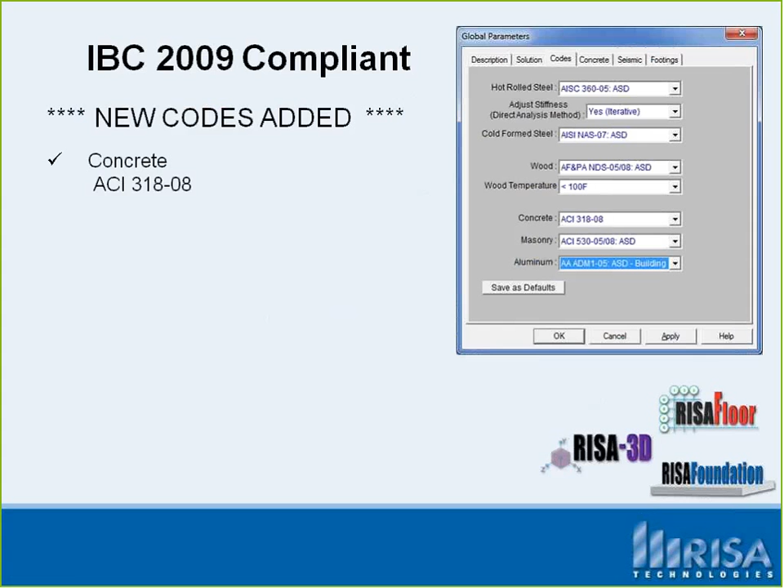Some smaller things will affect you interface-wise for this. A lot of these codes got updated but didn't really do much to your interface. For Concrete, you're going to see there's a Lambda that was added for 2008, and that'll be in your materials spreadsheet, so look out for that. The Wood NDS 2008 was also added.

That one really doesn't have a whole lot in the interface. You might see some wood schedules that were updated for the IBC 2009 if you're using wood shear walls, but for actual NDS 2008, you're not going to see too much interface change there.

Cold form steel was added for the 2004 supplement, which is really small, just a supplement to the 2001. 2007 did introduce a little bit more changes there. Interface-wise, you might notice some differences in your detail report. We also went ahead and updated the AISI database of shape materials and the SSMA database of shape materials.

Those have been updated for the 2007 AISI. If you are using cold form steel, these are really different shape properties than what you were seeing in the 2001. Not so much that they've changed the shape properties, but you're going to get different results. So make sure you pay attention to whether you're using 2007 SSMA shapes or 2001 - that one was kind of a tricky one.

Masonry has been added to adjust for the MSJC 2008, which is kind of new there. Also, the international codes were updated - we put in the Canadian concrete code for 2004 and 2005, and updated Mexican cold form steel for 2004 and 2007. For cold form steel, that just rides right off the American code, just like the AISI, so you'll see that will be almost identical.

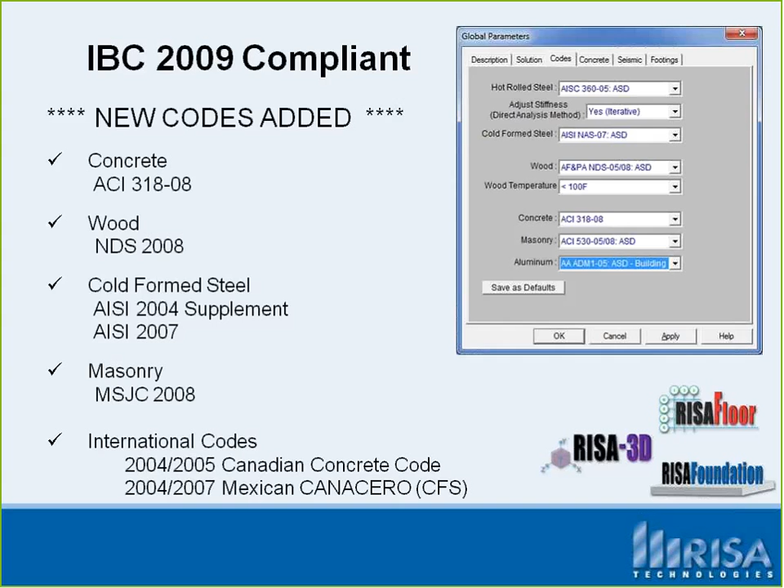One of the big features we added was concrete wall design. We've had masonry shear walls and lateral walls in the program - you can use them as gravity walls. We have wood walls in there, and we had a general wall. Now this will be brand new to RISA-3D and RISAFloor: concrete wall design. So what will be cool here is that we're going to be able to do gravity and shear wall design with this wall feature.

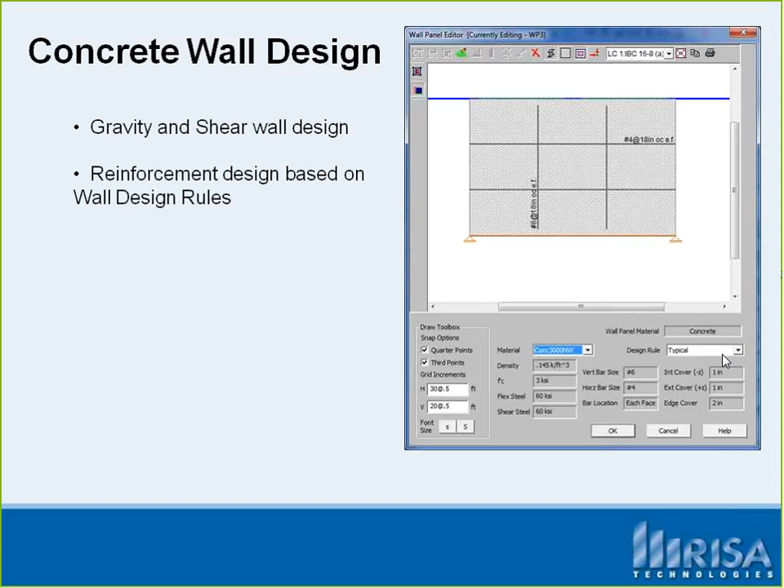This wall panel editor on the right looks exactly like what you'll see when using masonry. You can notice on the bottom it gives you all the information - the materials, the density. It's based off a design rule, just like when we use a masonry or wood wall, so all this information will be similar to that. Reinforcement design is based on the wall design rules, so just like in masonry, we're going to go into the design rules and adjust all that information. We'll specifically look at that in the next couple of slides.

The deflection is going to be given to you based on the FEA results. So while you're drawing walls, really what's happening is there is actually a plate model right behind the scenes. It really is just going to be the wall is for design, but really you have a plate model that's built in and submeshed behind there for you. So you get all your deflection results based on the finite element analysis. You're going to get P delta analysis for first and second order effects there, so little P delta and big P delta for concrete walls, which is really nice there.

You're going to be able to have the crack factors. Now these are specific for the wall panels, and you're going to find them specifically in the wall panel spreadsheet, not in the global parameters or anything like that. You're going to find it right in the wall panel spreadsheet, so you could actually change it per wall if you had a different crack factor.

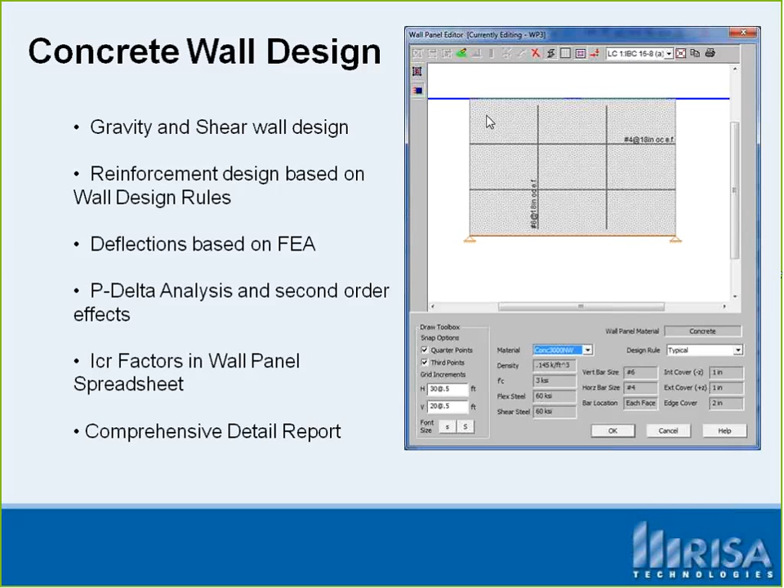And then we have a comprehensive detail report that we're going to be able to look at specifically when we get into the program. So what I'd like to do is walk through these slides first, and then we'll jump into the program. Okay, so next, let's talk a little bit about the concrete wall design specifically for the design rules.

So here we see that the program is going to be giving us a design rule for concrete wall rebar and cover. What we're looking at here is actually going to be our cover information.

We can tell the program to use either outer bars for the vertical orientation, so we're going to tell the program to put your vertical bars on the outside, or we can tell the program to use horizontal bars on the outside. Now that affects the way your D is measured from the vertical bars. So you can see in my picture here, it's a little hard to see, but you have a little D in there, and it's going to be measured from whether it's from the outside or from the inside, and that's going to make a difference in your calculation.

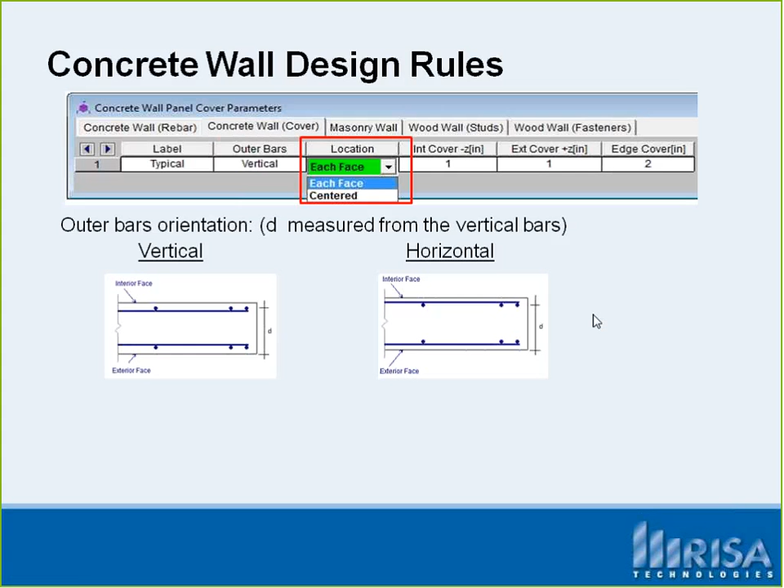You can also tell the program just to use centered location or each face. So what we're looking at here is on each face reinforcement, but we could have told the program to use bars centered, which will run the bars right directly through the middle of the wall.

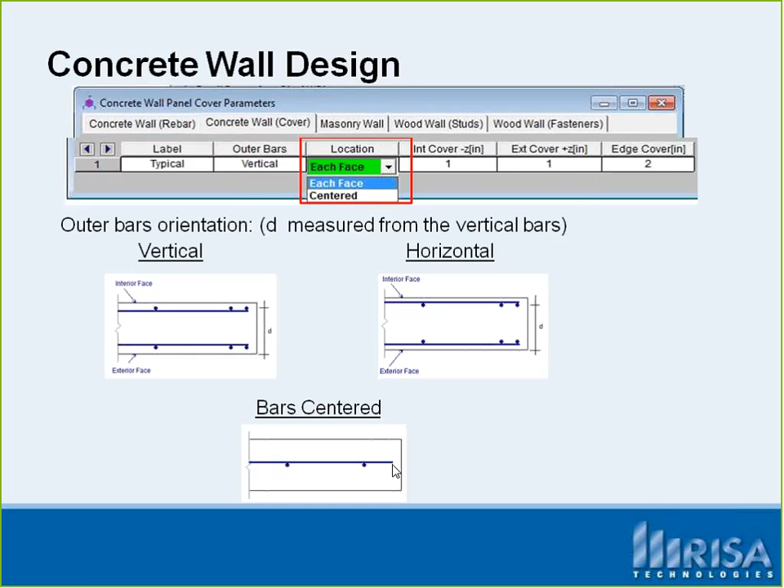The next thing you have control over is whether you're going to be doing any different cover from the inside or the outside of the wall. So you can tell the program here, and you see this is internal cover versus external cover, and you can tell it whether you're going to be having 1-inch cover versus 3-inch cover on the interior or the exterior.

You can also tell the program there to do an edge cover. So what you've got here is you're going to see this little 2-inch distance from the edge. You can tell it 2 inches right there on the edge.

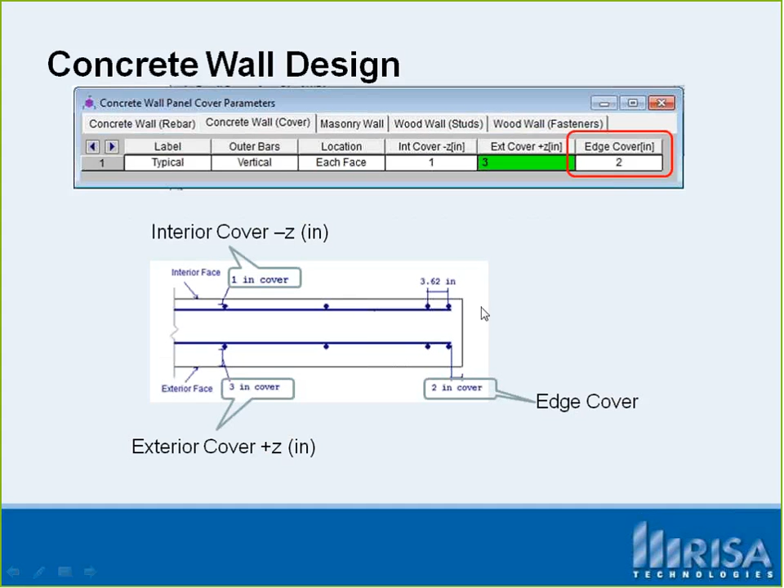The last little piece is this dimension up here, and that one's just because what we're doing is we're centering those bars. So what we have here is a little bit of extra. So we're using, in this example, 3.62 inches extra on the side because the interior bars are all going to be spaced evenly, and that extra little piece is spaced out here. So it's just an important note to make there when we look at the detail report.

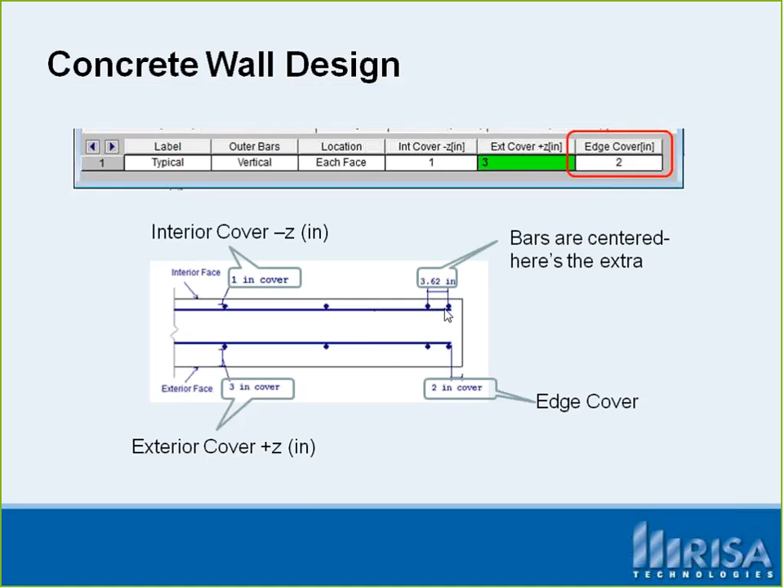Concrete walls here are also going to be color-coded based on the rendering view. So what's happening is, as we just talked about, we have the ability to do interior and exterior. Well, it's important to know which is the interior versus which is the exterior. It could be kind of tough if you didn't know that. So one of the nice parts is that we've got it color-coded. The exterior is a dark gray color, and the interior is a light gray color.

So you're going to use a negative Z there. And this Z, when I have that little Z in that positive Z, what that's indicating is your local axis. So you can indicate, actually, if we could turn the local axis on, we could say, okay, that would be the positive direction of the local axis versus the negative direction of the local axis. One of the tools that we gave you here is that if you make a mistake, which happens to me a ton, and you draw the walls in the wrong direction, what I do is I just use this flip axis tool.

It's directly under my Draw New Walls. You'll see a new tab called Modify Wall Panels, and right down at the bottom you can say Local Axis Out of Plane Flip. So you can flip those axes yourself. That's a really good tool there.

Then the next piece here, we'll go back into concrete walls, and when we jump into a model, the next really great tool we added is seismic detailing and design provisions. Now this is a big actual feature, and it covers a lot of different codes here.

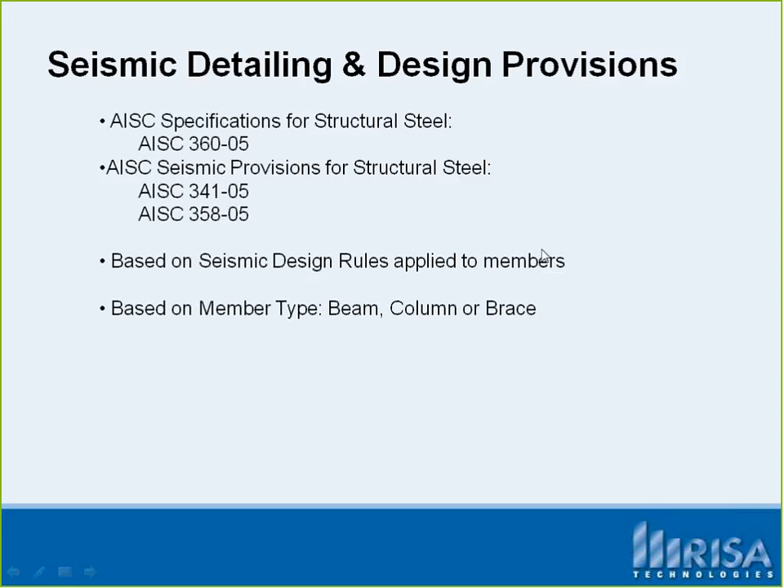This is also going to apply to our earthquake loads. So when you use our load combination generator, it's going to help you develop these earthquake loads, also with overstrength. This is something that did get added in the last version of the program, but I'm not sure if everybody knows and has been using it, so we will review that.

If overstrength is required, you might have it for your beams and not your columns, or reverse that - however it's set up in the code, you need it for one, not the other. You can adjust that. What you'll specifically look at is making sure you use your EL or your ELX, where you actually use the earthquake load in your load combination. The load combination generator is going to automate that for you.

Results appear in the detail reports and in the spreadsheet. So all of the output we're going to get will be listed in each member's detail report and then summarized in the spreadsheets for us.

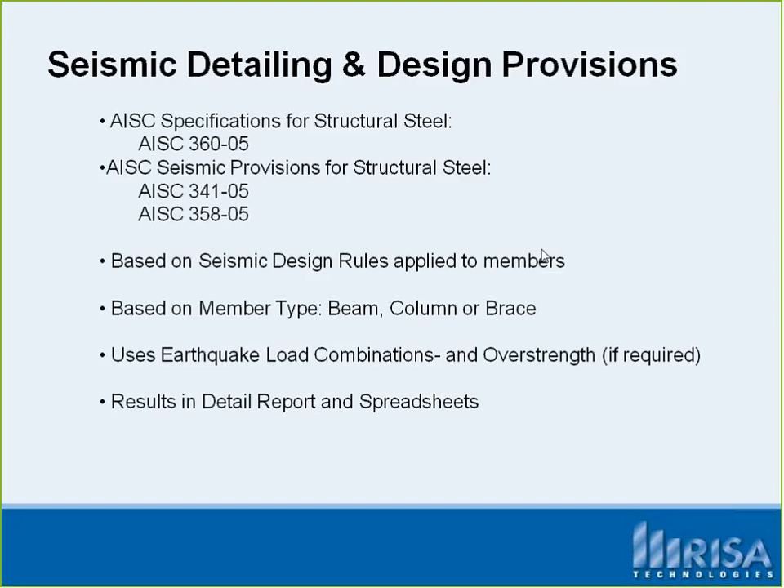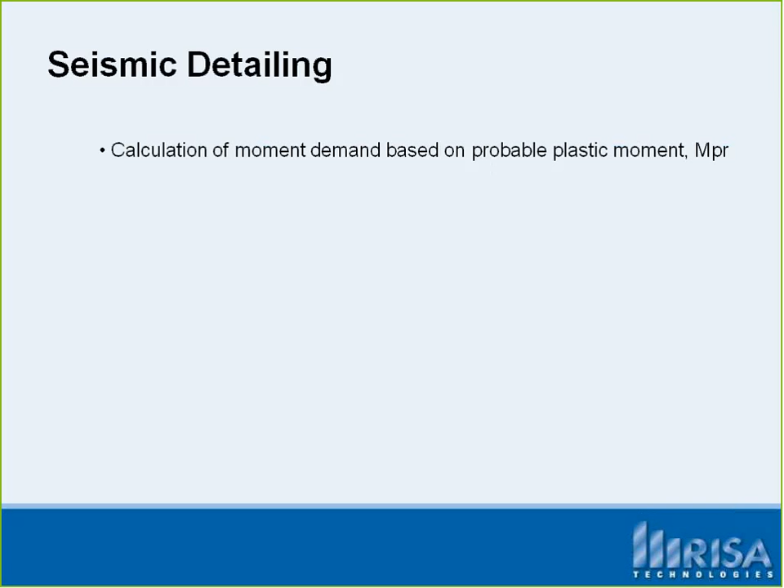So we'll look a little bit closer at seismic detailing. First of all, what are the things we're doing with seismic detailing? It's kind of a vague topic, so this goes a little bit farther. We'll talk about a lot of the little things we're going to be calculating for you, including the moment demand based on the probable plastic moment, the MPR.

We'll see that we're also going to be calculating the panel zone shear requirements - you're going to get a whole big area on what the panel zone requirements are for shear. As well, we're going to do a calculation of the required shear demand for moment connections. We're also going to be going through here...

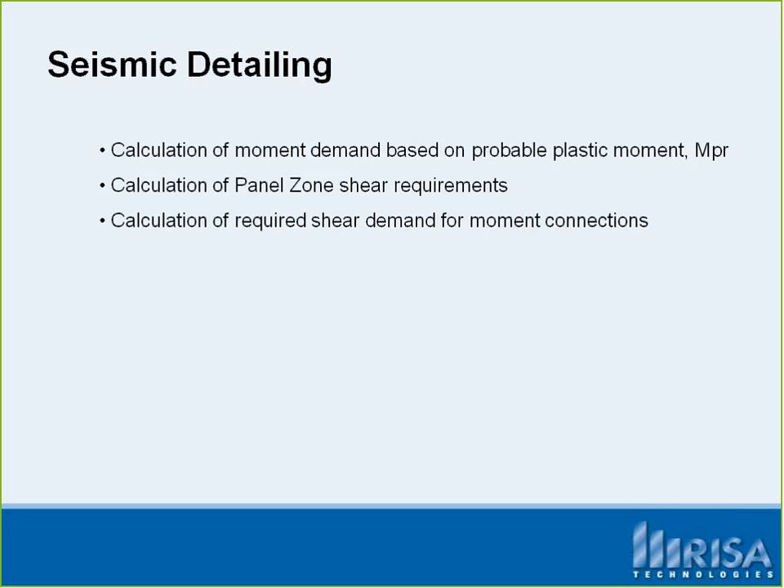This is actually - looks like my picture's a little off here - but what we're going to be doing is the compact sections. We're going to be giving you whether it be seismically non-compact or compact. You can find that information right off your 358 - actually, excuse me, 341 is where you're going to find that.

And that's going to be in the tables, labeled as sections that satisfy local buckling requirements. It'll tell you whether it's seismic or non-seismic compact, and the program will check it right there for you too.

We're also going to do clean column checks for you, telling you whether you need stiffeners or continuity plates, based on your columns.

We're going to give you some strong column, weak beam checks for you. The program will actually know what frames into it, what beam frames into the column, and it's going to check that information for you.

We're going to do brace slenderness checks, so if you have a braced frame, we're going to do the slenderness checks for you. The calculation of the unbalanced forces for the braces is an interesting one - I'll show you more about how we're doing that. It's calculated for the brace and then reported on the brace and also on the beam that it applies to.

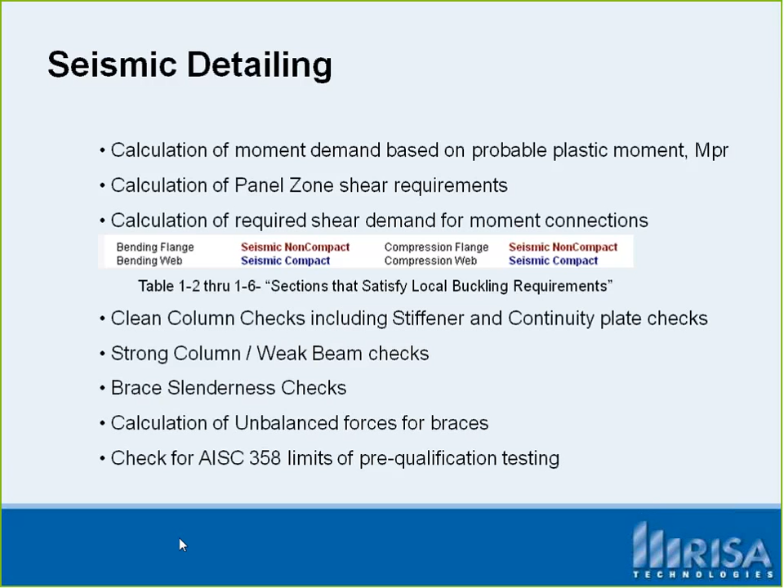And then we're going to do some checks for AISC 358 limits for pre-qualification and testing. You're going to get a lot of miscellaneous checks during your analysis, and it'll report to you. This is just some of the list, and it gets more detailed as you get more involved with special moment frames or intermediate moment frames. But I wanted to give you a brief summary of some of the things we're doing.

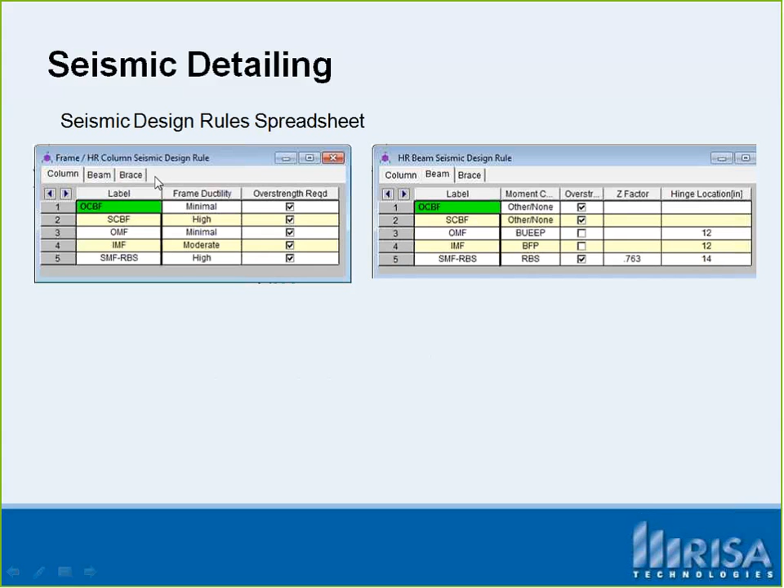What you tell the program specifically is in the seismic design rule. You can go into the seismic design rule, and this is a default that will be set up for you. So you won't have to set up your defaults, but you will want to know what's happening in here. You'll first notice it's broken up into tabs as column, beam, and brace.

The first thing under columns is your frame ductility. You're going to tell the program whether you want high, moderate, or minimal. For a special moment frame, it's high ductility as the default. For an intermediate moment frame, it's moderate. For an ordinary moment frame, it's minimal. So that's the setup as you're following there.

Then in the next column, you tell the program whether you need overstrength required. A column will have overstrength required for a special moment frame, and also for the beam tab we have special moment frame checked for overstrength. But for the intermediate moment frame and ordinary moment frame, OMF and IMF, those are not checked for overstrength.

We're going to be using the overstrength load combinations for some of these things versus others. So load combinations just got a whole lot more complicated, but hopefully through these quick check boxes, it makes it so easy for you to check on and off when you want it to apply.

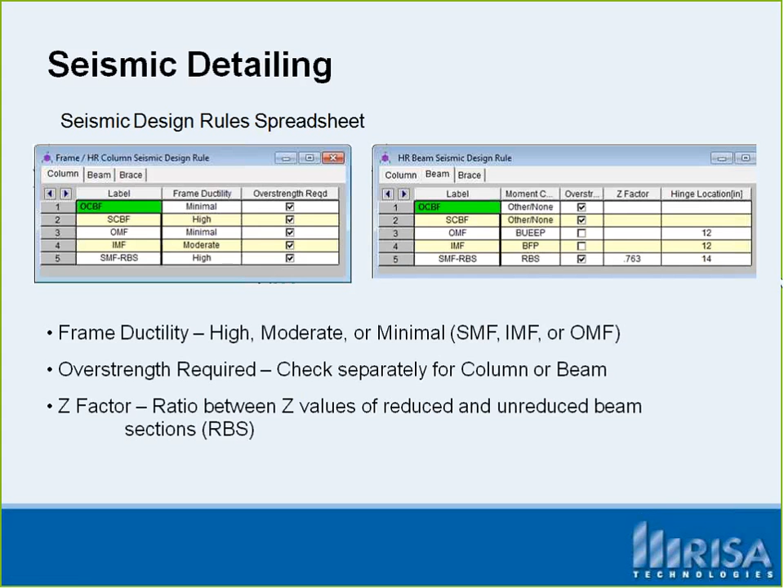The other thing we see in the beam spreadsheet is a Z factor, which is the ratio between the Z values for the reduced and unreduced beam sections. For RBS, reduced beam section type connection, you'll have this factor to apply, calculated based on how much you're taking out of that beam in the dog bone area.

The hinge location is another thing you can tell the program if you're using any of your moment frames, and that's your hinge location measured from the face of the column to the hinge. So those are the columns really that you need.

The brace is just going to ask you if you want to apply the special KL over R for that. So that's really all you need to do for seismic design rules to set it up. The last column is the moment connections and how you're going to be doing the moment connections.

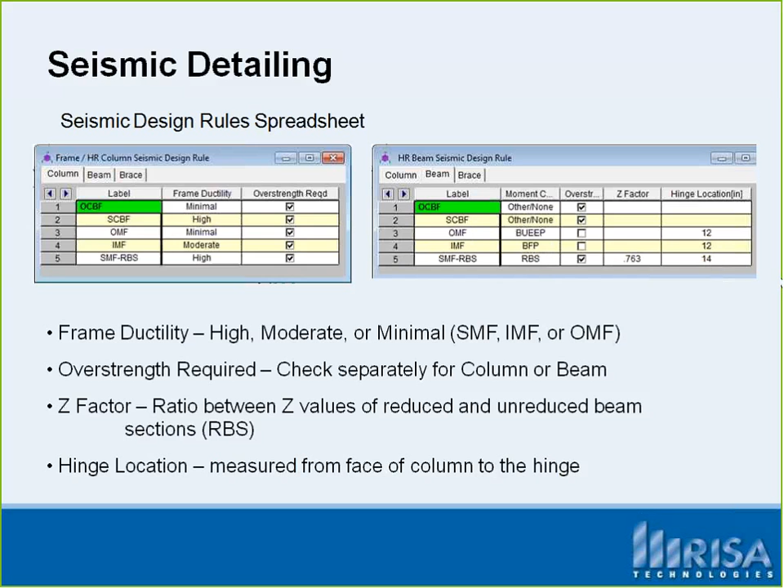We're going to see that in the next couple slides about telling the program what you're going to be using. But that's really all you need to set up, and what's nice is these defaults are there for you to get started. So for seismic detailing here, I'm going to actually jump ahead really fast.

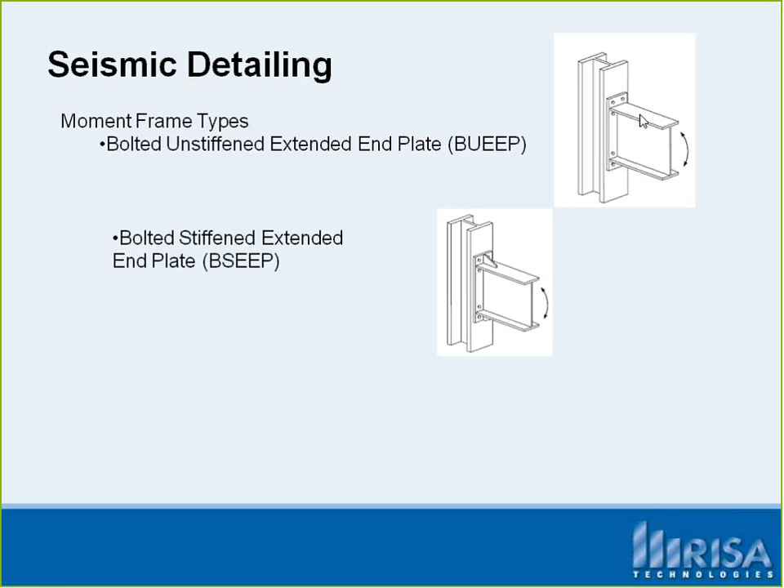The next one you can do is the moment frame type using the bolted unstiffened extended end plate, or BUEEP. That one, the picture is just showing you here, so this one's just not stiffened. The next one you can do is just a stiffened version of that, a bolted stiffened extended end plate, and you've got that stiffened right there.

The next one you can do is a welded unreinforced flange, welded web, so WUF-W, that's kind of that picture right here. So you've got all those different options. And the last one is going to actually be your braced frame.

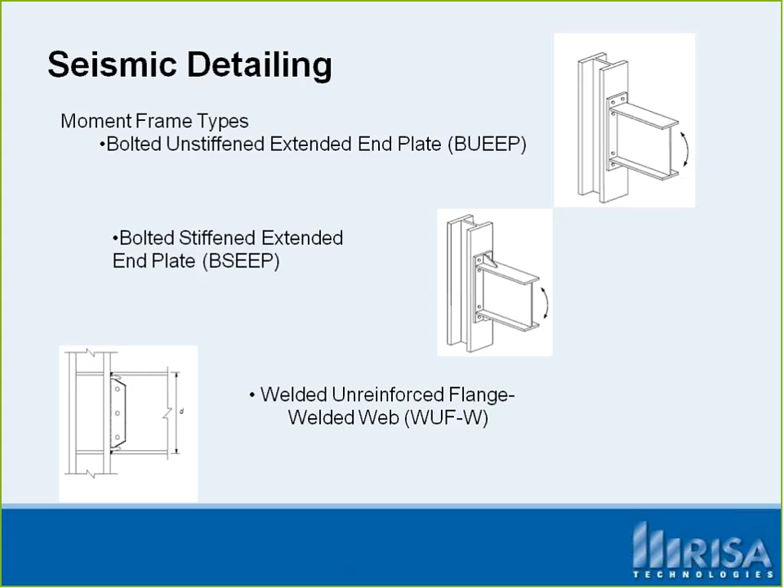I'll show you a quick picture of what we would talk about with a braced frame. We can do a braced frame like this, we can do inverted, we can do any sorts of braced frames here as long as it's a concentrically braced frame. What we've got here is a picture.

What I wanted to show you specifically for the braced frame is that it's important that you note that you can get your unbalanced forces. And what our unbalanced force here is going to be showing us is that we've got braces. You apply these braces, you've got forces in the tension direction and in the compression when we apply the load to it. You see a free body diagram of the tension versus the compression and where it connects into the member.

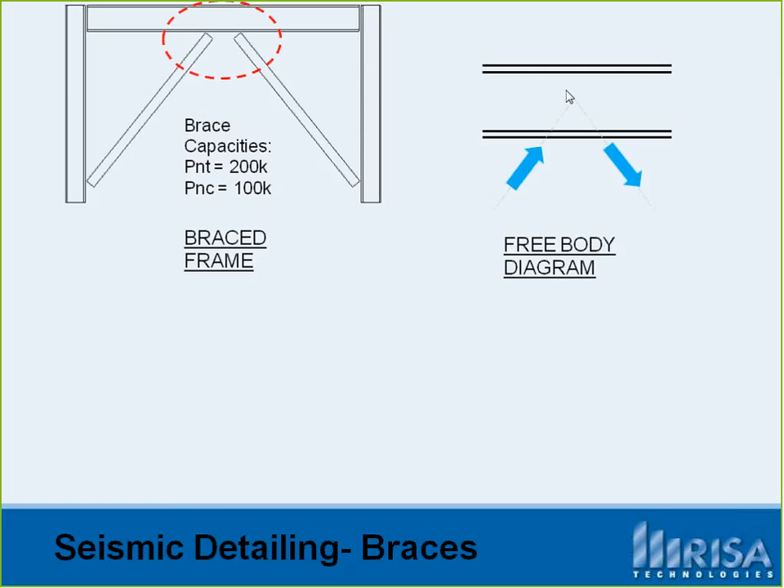If you see what typically happens with a braced frame, you're going to have a compression brace, and the code is going to tell us that we can use up to the tension value right here, but we need to reduce the compression value as it buckles. So we're only going to be using 30% of the compression strength in this brace right here.

So what happens in the model is that you get an unbalanced force in the beam. The beam is going to experience this unbalanced force. So what RISA is going to give you here in this detail report is the forces of that component on a detail report. This unbalanced force is broken into two different components, vertical and horizontal force, that's going to be applied to the beam there. We're going to give you that force in the actual brace report, and we're also going to see it in the beam report.

One of the things I did want to quickly show you, I misordered my slides, but I want to show you a little bit about what the color display is going to be able to give us. Seismic detailing here is going to be able to show us the color coding and the display of the design rule on the actual member, which is cool.

We can see here we're using ordinary concentric braced frame, specially concentrically braced frame, all listed on there. If by chance we made a mistake and we were mixing things up, we would see that color coded. The other thing it's going to do is give us column stiffness checks right on the color coding. So I just like to show you how that looks in the legend. It shows us whether you're going to need web doublers, whether you're going to need continuity plates, or in green, a clean column check, basically.

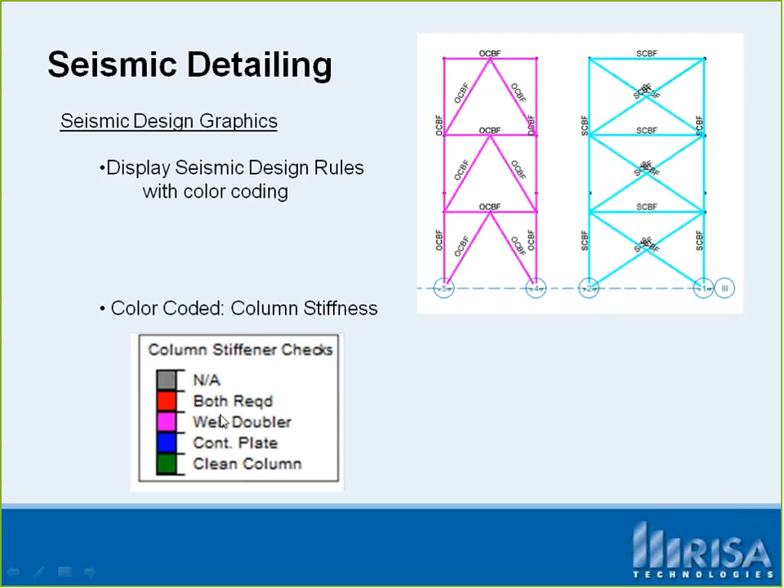So the whole model we can color code, and if everything turns out green, then basically we have clean columns all over our model, which is great. That's an easy way to check it, and everything in gray doesn't apply. So we can see that in the model, I'll show you that once we actually run the model too. Let's take a look, keep going. Sorry about my misordering.

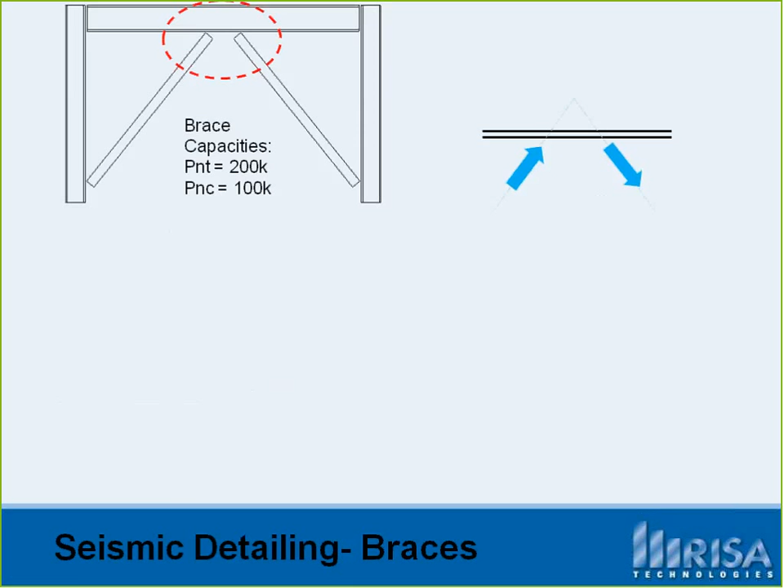The next piece I want to jump into is some of the little things we've got in RISA Foundation. We added overturning for the mat slabs as well as sliding checks for the mat slabs. So when you're in RISA Foundation, we've added a safety factors tab right at the bottom, and you'll see overturning safety factors and sliding safety factors spreadsheets. That's going to give you all the different information. So when you're doing a combined footing, you'll get everything you would have gotten if you were just doing a single footing for the overturning and sliding checks.

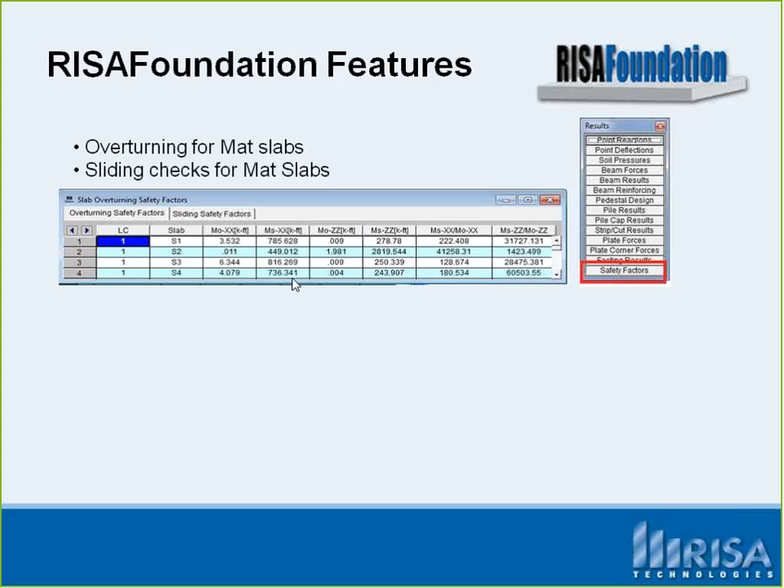We also added a new quad mesher for the FEA analysis, which makes everything much faster for your slab design and more accurate. When we talk about quad mesher, we're really just talking about the plate design and plate analysis. That's what is happening in the wood walls, concrete walls, and masonry walls. We were able to put that right into RISAFoundation, so you get a speedy result compared to what we had in the older versions.

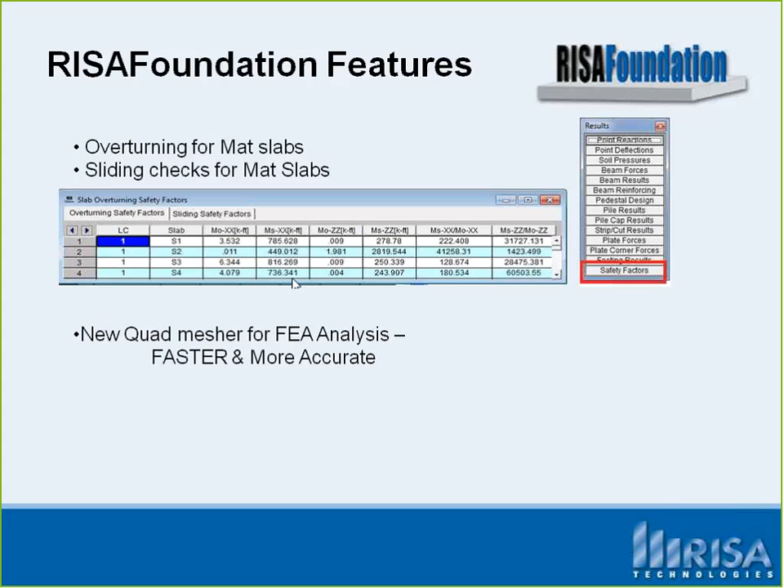The other thing is we've got a pile cap export. So we can now export all of this DXF directly for the pile caps as well. We have a lot of different DXF export options, but pile caps was one of the last things to get in there.

Additional checks we've got in the program too - we've added several little things here I'd like to point out. We have single angle bending checks. That's a big one that folks have been asking for a long time, to be able to apply bending to a single angle. It wasn't so typical when RISA-3D came out years ago, but it sounds like lots of folks are trying to actually use their single angles for bending, so we added that directly into the program.

I showed you a little bit about that wall local axis flip - that was an easy thing to see, but we can also see that in the program. We added P-delta for walls. Concrete was one of the things that required that, but we were able to add that directly in also for masonry and general walls. You have the P-delta analysis.

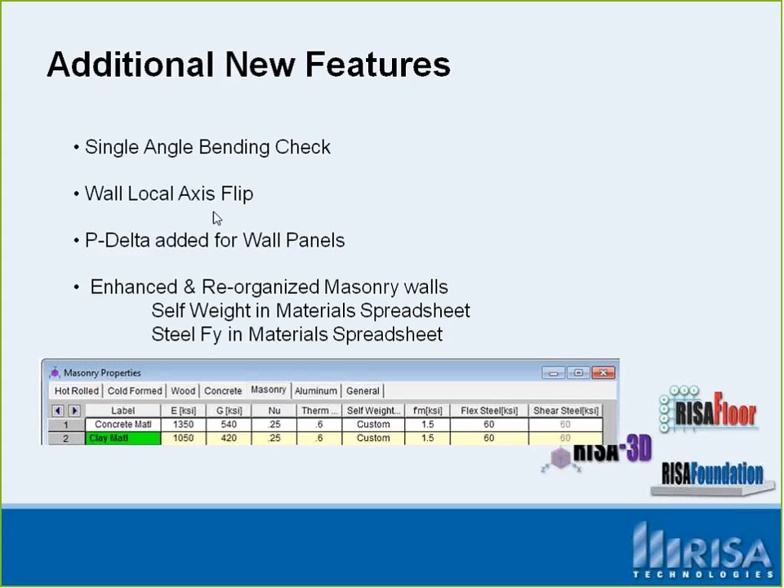One of the things you're going to see is that we had some enhancements to the masonry walls. If you are familiar with using masonry walls, there are just a couple of enhancements and reorganizations, and I wanted to point out so you don't get lost that things like self-weight went directly into the material spreadsheet, as well as you're now going to find your steel FY in the material spreadsheet.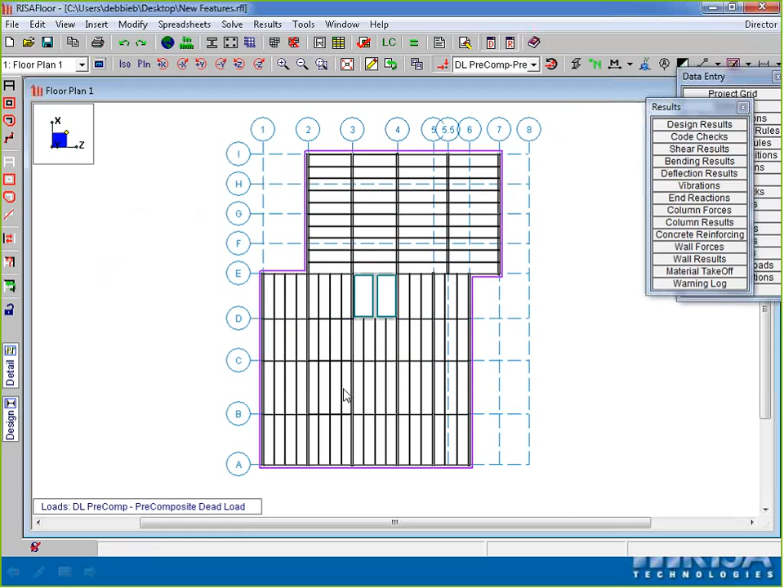One of the things here I want to do is jump right into RISAFloor and see a model in action. Specifically, we're going to jump right into this model. It's just a 3-story model I built, with some moment frames and some concrete walls, but in particular I just wanted to show you a couple of the aspects in this model that we added here as differences.

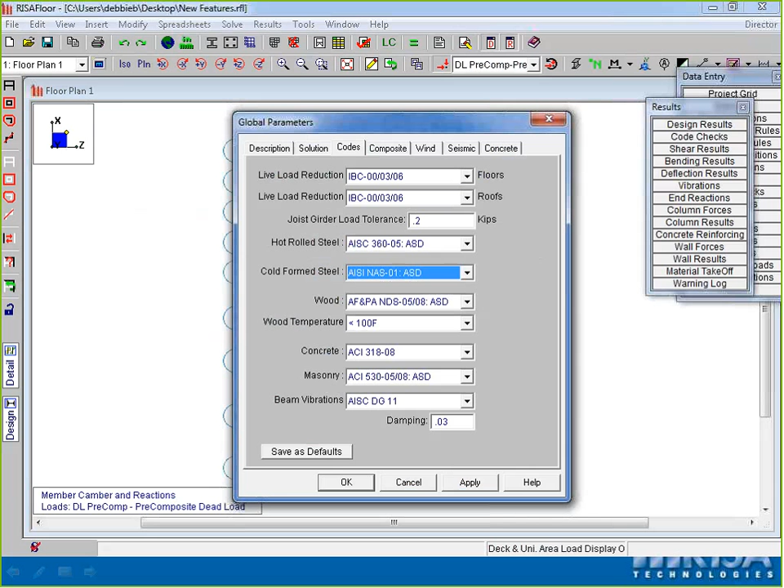So like I mentioned, you've got the codes that were updated directly - you've got the 2007 AISI, and I'm running here some wood, 2005 and 2008 wood. The seismic tab has really been the same in RISAFloor since you've been doing a lot of this in RISAFloor forever, but you will see that you have the omega factors added in here, and the rho is added in here.

Let's take a look at our concrete walls. If I just double click on a concrete wall, this does have reinforcement listed on it. You can toggle your reinforcement on and off by just clicking this button on the left. But like I mentioned, it's going to be based on my design rule information.

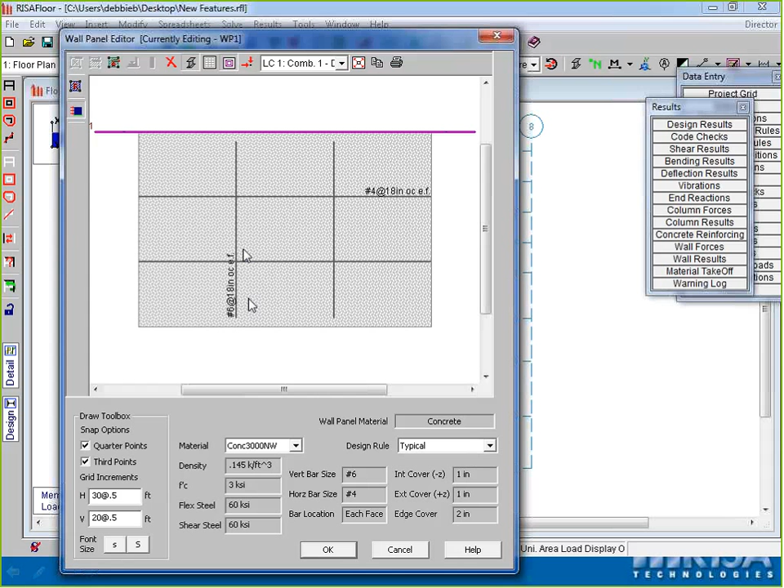One thing I didn't mention that's really important is that you can control this reinforcement design directly in the wall design rules. The concrete wall rebar tab gives us the ability to control the vertical bar spacing and the maximum and minimum spacing there.

You've got the size and the maximum spacing, and the vertical increments. That tells the program how often to increment when it doesn't work for design. So we start at 4 inches, go up to 6 incrementing by 2, then to 8, and so on until we get to the maximum vertical spacing.

I'm not going to clear my results so we can jump into the next program. You can also control your horizontal bar spacing, and you can control all of that right there. Another thing to note is that we broke up the design rules, so you're now looking at member design rules separately from wall design rules. I don't want you to get lost if you're familiar with just that one design rule tab on the data entry—we broke it into two different items.

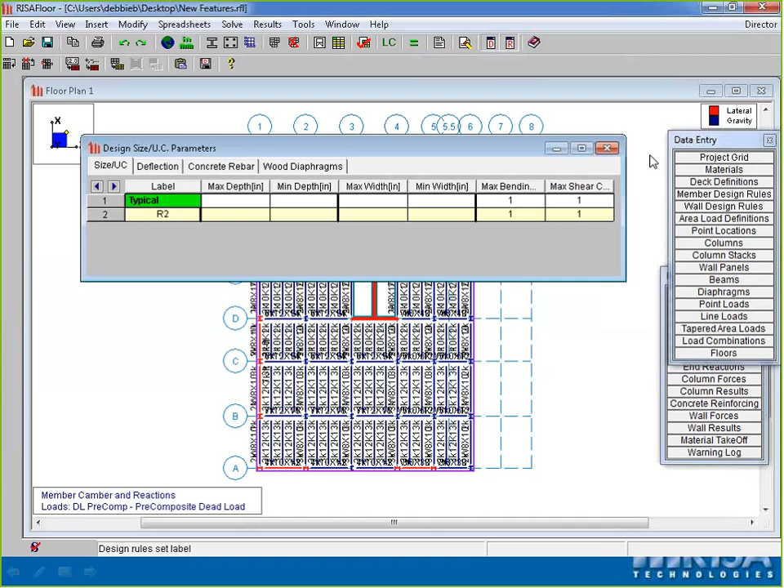We can also look at the detail report here in RISAFloor and see what we've got available. This is only for gravity loads, looking at ACI 318-08, and what we're seeing is an echo of all the information we put in. We told it number 6 bars for vertical, number 4 bars for horizontal, and the materials we had in here.

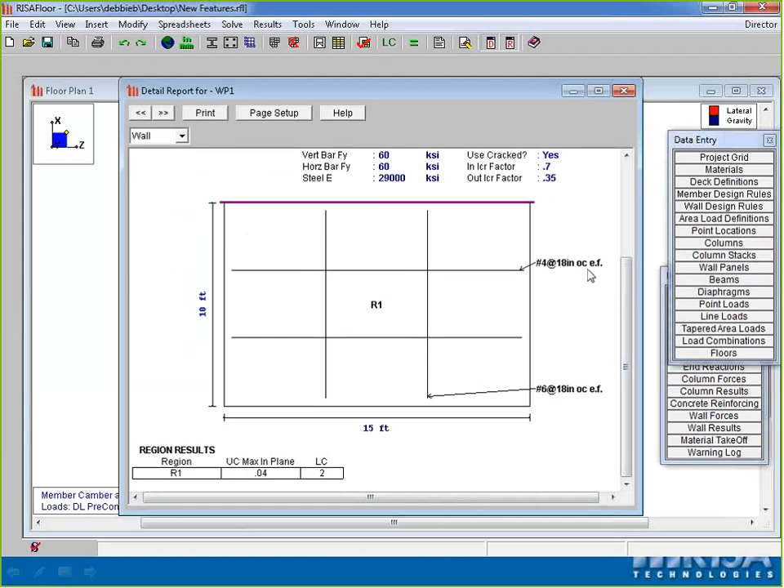Scrolling down we can see there is one region controlled by load combination 2, and this is the detailed picture—number 4 at 18 on center and number 6 at 18 on center, each face. I can also look at the region report.

Again, this is only looking at the gravity loads—we haven't gotten into lateral yet. So what we see here is just the gravity information, with a nice detail report and cross-sectional detailing at the bottom. We'll look at this a bit further in 3D since it'll be more informative.

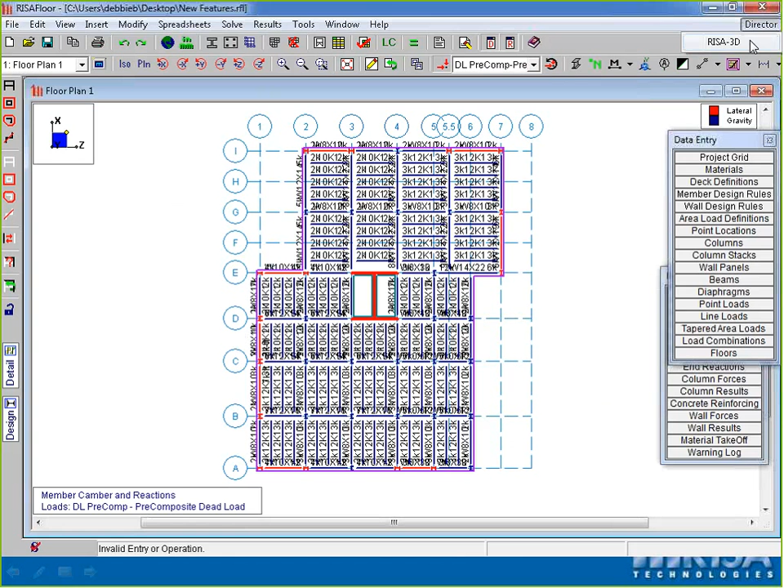So I want to jump right into RISA-3D using my director button at the top right, moving from this model into RISA-3D. Now in RISA-3D, I tell the program the wind loading I'm going to apply onto the model. I'll just say OK.

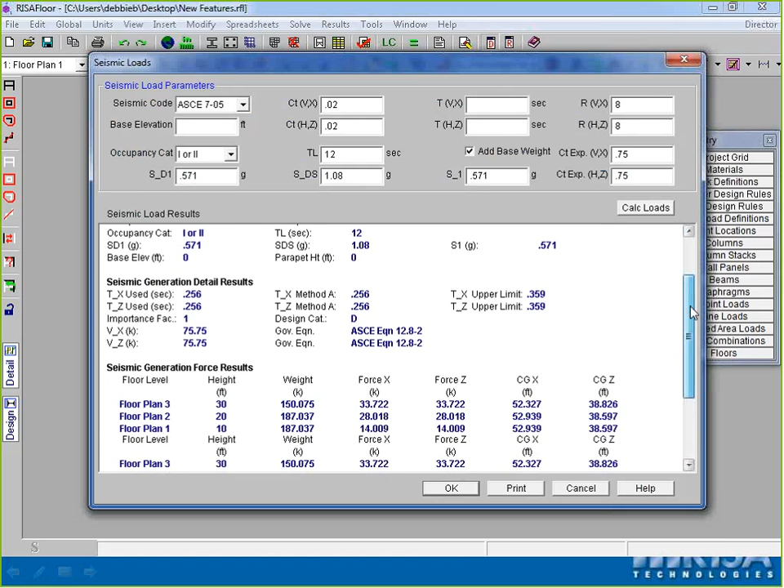For the seismic loading, I've already placed in some numbers, but you've got your R factors in place, your SD1, SDS, and S1. I put in some values for our region here, kind of high California numbers. If you scroll in, you can see the seismic generation input—we've got all the seismic forces we're going to be putting in.

If I say OK, I jump right into my global parameters. First thing off the bat, if you're a straight RISA-3D user, you'll notice there's a seismic tab—this is brand new.

You're getting a seismic tab right inside RISA-3D, and you'll be using your omega values and rho values right there. The rest of these values are used for your seismic load generation. If you're not using seismic load generation and applying your own seismic loads, these won't really apply to you, but it can't hurt if you want to use our seismic load generator.

You just go into Insert, and you can use seismic loads. The only caveat is you do need a diaphragm if you're going to use the seismic load generation—that's an important piece. You need to make sure you address your omegas here if you're going to do the overstrength when talking about seismic detailing.

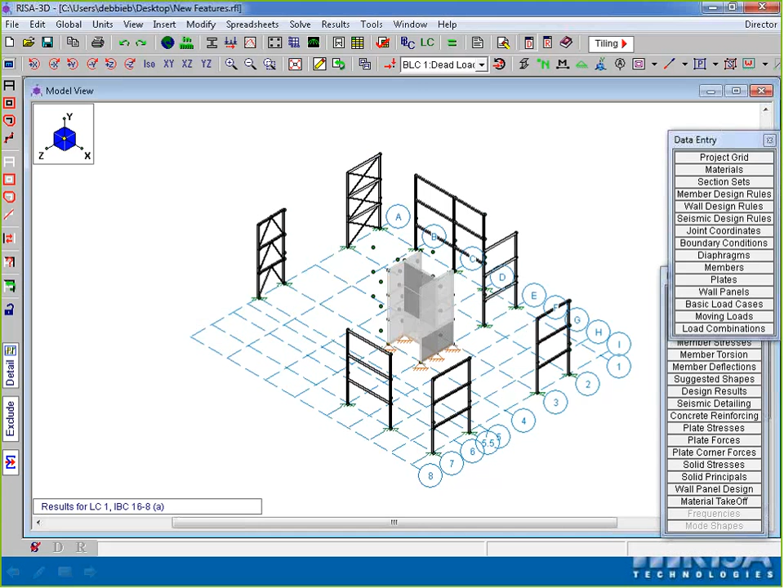You'll notice only the lateral portions came across—my braced frames and moment frames. Let's take a look at the members color-coded. I mentioned you can show the seismic rules and also label them, which is a good way for us to see what I did in my model. It's got some colors and now shows us seismic rules here.

So it's telling me in the pinkish color, I have an ordinary concentrically braced frame. In the bluish, I have a specially concentrically braced frame. I've got some ordinary and some special braced frames here with RBS, all of that in place. So this really helps see what we're looking at in the model.

The next thing we can do is take a quick look at my load combinations. I already set them up, but I want to show you how easy that was to do. When you have all of your dead load and live load laid out, that's pretty easy. But these earthquake loads, especially when we start using this overstrength omega, start to grow pretty fast. We only have 15 listed here, but it can go a lot larger, especially if you're using snow loads and things like that.

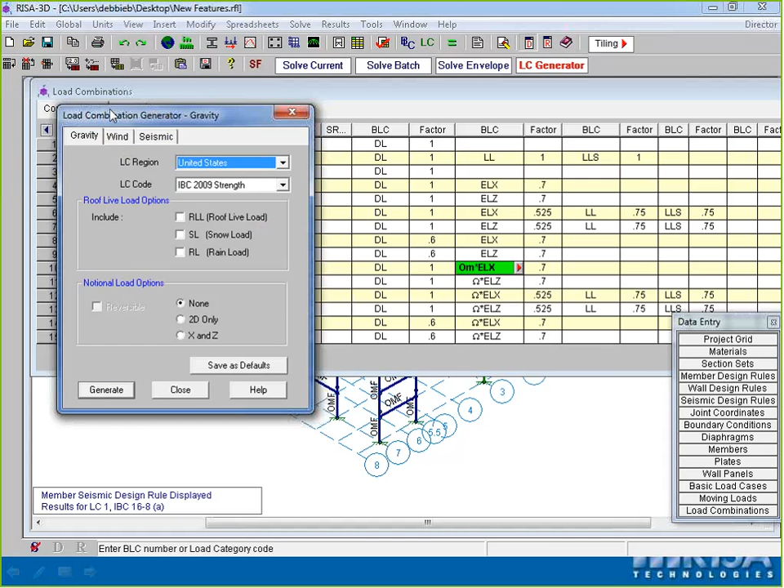So with the load combination generator, if you haven't seen this yet, basically you're going to be applying your IBC 2009. You can use strength - I have strength laid out here right now - or ASD, and you can tell it to use notional loads for the gravity loads. I'm going to jump to the seismic tab, and if you're going to be using the seismic loads generated by RISA-3D, you'll want to use the X and Z, or the X and Z with eccentric, those two options.

Then you're going to tell the program here, do you want to apply the rho, do you want to use the EV, do you want to use non-orthogonal? This is going to be multiplying lots and lots of loads. And also, which loads do you want to use for overstrength? So again, if you're using the load combination generator, you'll want to use the X and Z with eccentric, and then you'll be able to see that laid out for you.

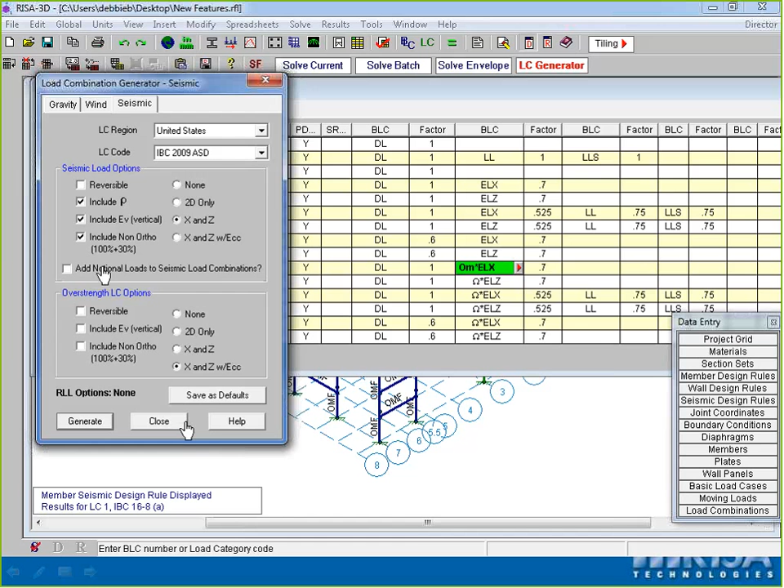I'm not going to create as many as that because I want to show you more information without having to rerun the model. But this is where you'd do it - you'd just say generate, and it would generate tons and tons of load combinations for you. You can also weed things out. I let everything, all these different combinations, run, but you'd probably want to go through here and say, okay, I didn't really use any live load special, so this might be redundant if I'm doing things like that. Or go ahead and use them all.

I'm just going to create a little bit of a larger model for you. Okay, so I'm going to close that for a second here.

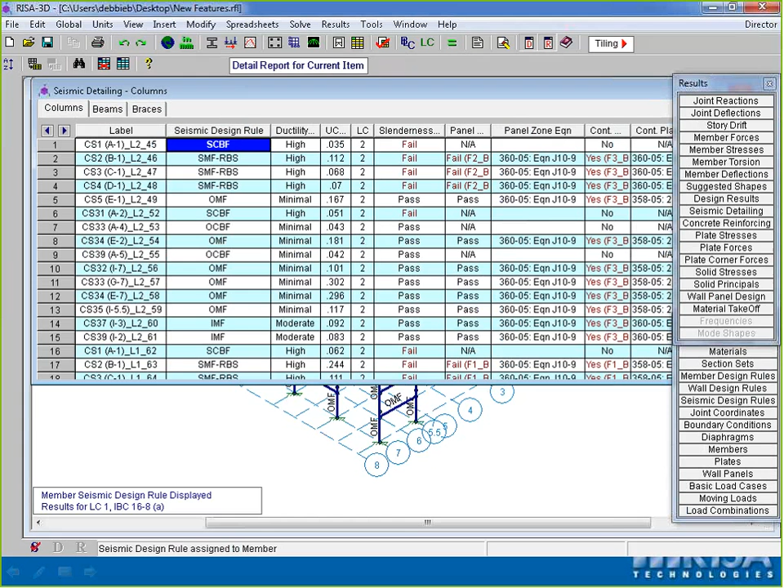And one of the things, let's take a look - this actually, we have results already present, so we can jump into some of our results and take a look at what we've got. Seismic detailing, first thing off the bat, we've got a new tab here called Seismic Detailing. If you open that up, it breaks things down based on columns, beams, braces. The columns is the first tab here, and it breaks it down and gives us an idea of the seismic design rule that was used. It tells us the ductility - those are things we put on the input side. It gives us the unity check max, and what load combination was used for that unity check.

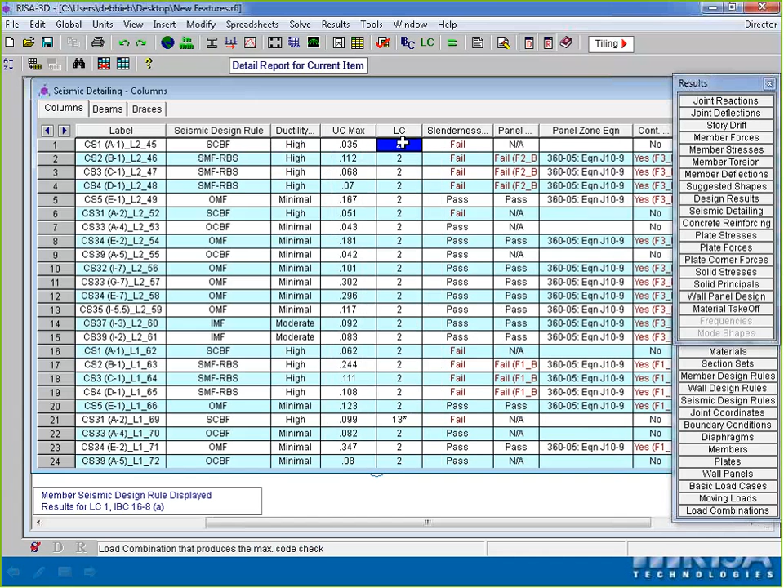What's an important new change here is that you'll notice 13 is there, but it's got a star next to it, and that star indicates that was an overstrength combination. So what's important for us to let you know is that load combination 2 was actually a gravity combination, not quite controlling us, but maybe this one right here is actually being controlled by an overstrength combination. As we scroll down, looks like that might be the only one on this column for my model being controlled by that. But that's an important note - you'll see a star on anything that's being controlled by overstrength.

And then you've also got slenderness checks, whether they pass or fail. So we're going to maybe go into the detail report to investigate further about what happened, and you can click on the detail report right there. But I'm going to keep going before we jump in there. The panel zone checks is going to be not applicable for certain things - so for a brace frame, I don't have panel zone checks, but then when I get here, I have a special moment frame.

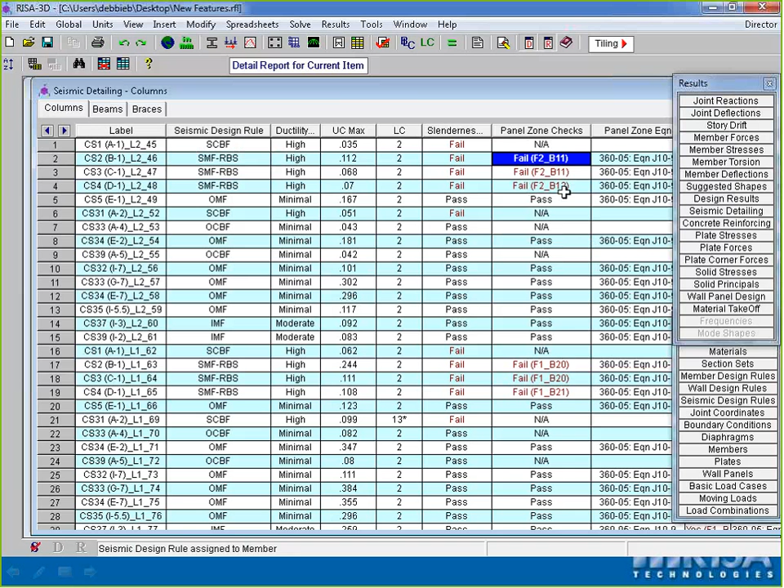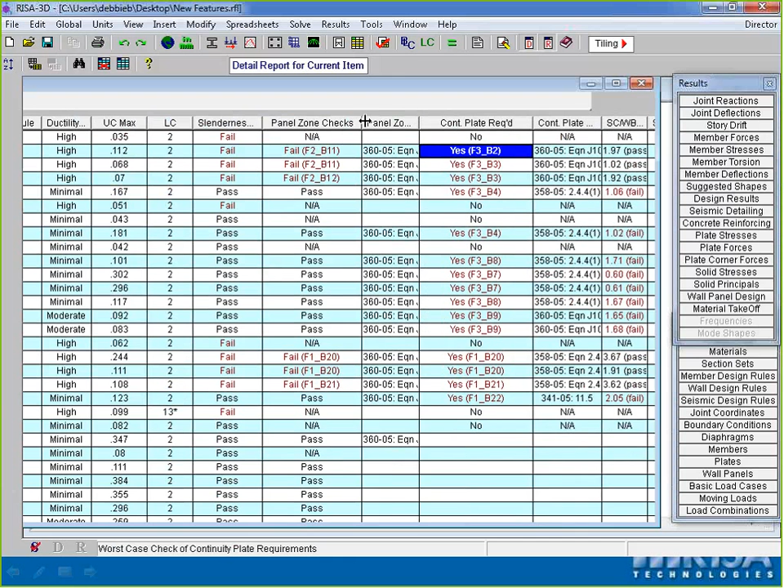It's going to be failing that panel zone check, so I might want to go in and investigate that. It's going to give me the equation that governed for that. Whether a continuity plate was required is listed there for me. I'm going to close some of these down a little bit. We also can see we have strong column, weak beam listed there, and then whether it passed or failed, or whether it just didn't apply.

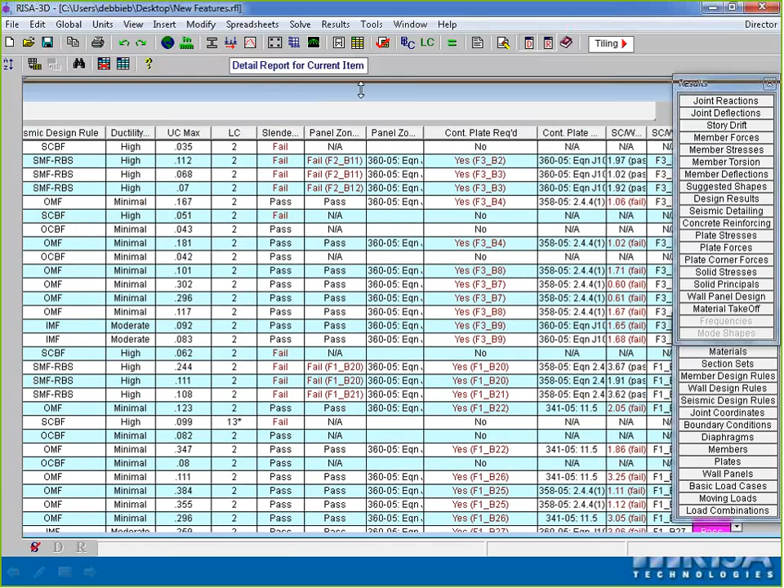And then you've got the miscellaneous checks. There's a lot of different miscellaneous checks, and you'll want to be able to go into those specifically in the actual detail report when it says fail, to see what was wrong with that. The same thing, you can go here. Let's see, I'm going to scroll over to the next page here. Sorry, this is a smaller screen than I usually use, so it's a little harder to navigate.

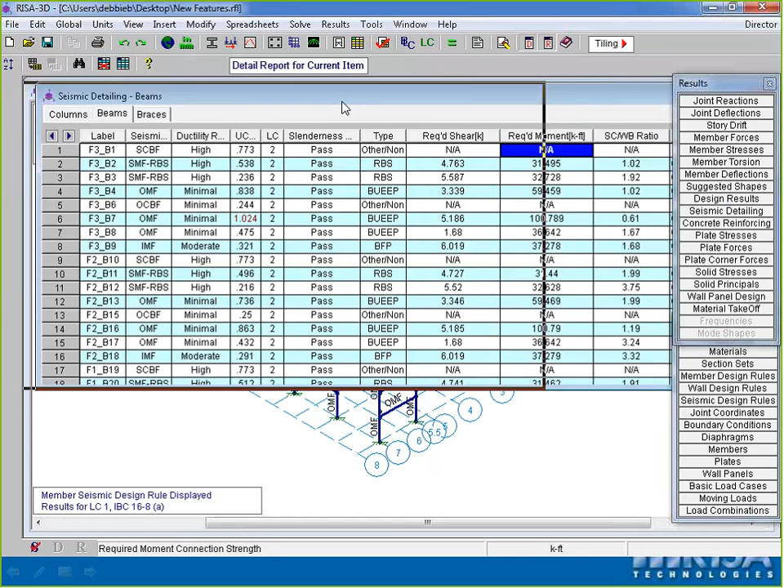But the beams have similar information. It's going to tell us again whether it's seismic, what type of frame was used, what the ductility was, and then what passed and failed. Required shear is listed there, required moment, you've got all that listed there. You've got strong column, weak beam. And then you have some span to depth ratios that are listed, and then the miscellaneous checks.

And then the braces we also have here: required tension, required compression, the unbalanced vertical force that you might need to apply to your beam. You've got unbalanced beam there, which beam you might need to apply this unbalanced check to, and then the miscellaneous checks, whether they pass or fail.

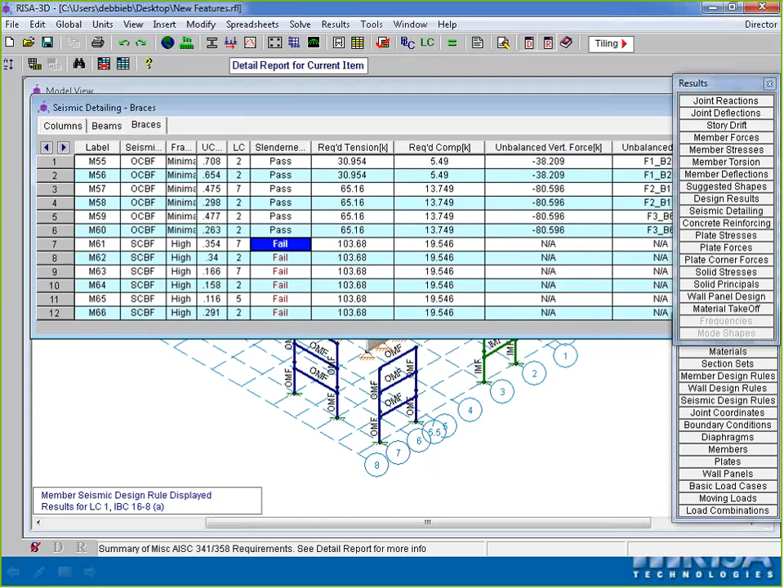So this is kind of just a nice summary. It's a lot of information, but what is, I think, more important for you is probably when you go and say, okay, what's going on in that one? Why is it failing, and why do I need a continuity plate? So you can click on one of these members and then just go straight to the detail report.

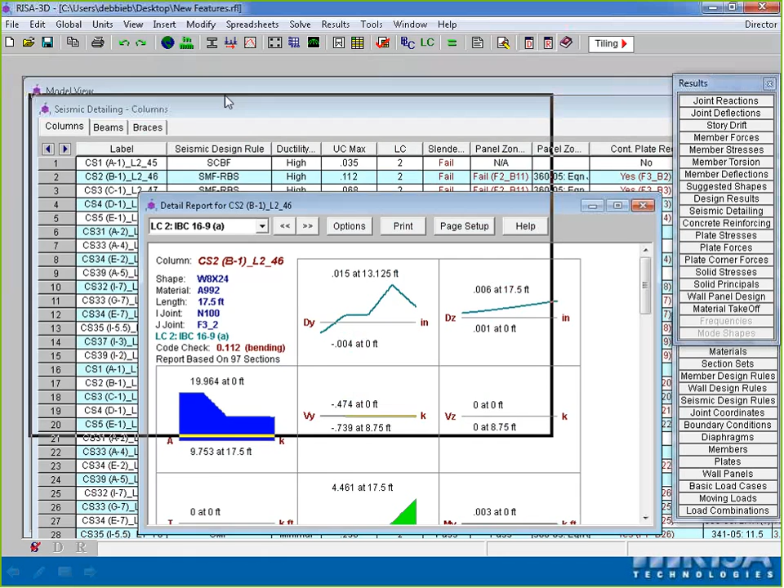So the detail report is going to give you the full story. First of all, it's going to be just your standard detail report. You can notice you've got all of the axial, the tension, the moments, all that listed out there for you. Pretty standard stuff. The first whole area is going to be the AISC 360-05 check, so this is your standard steel check.

But then way below that, you get a whole bunch of information. First thing off the bat, it's important to note, I ran a batch solution. So when I run a batch solution, I can look at a detail report, and it does envelope that for me. A batch solution is going to be running through each load combination, solving and saving each result for each load combination. The envelope seismic detailing results are actually going to take every load combination that was run and find the worst cases for me, because that's what's going to be important here. I don't want to look through all the different load combinations to understand what's happening. So the envelope seismic detail results is going to be helpful because it's going to actually do the worst case for me.

So we're looking at a column, and we're looking at a special moment frame with the reduced beam section listed out. Was this needed to be designed for overstrength? And yes, it was. We've got frame ductility as high. This looks like I am using a seismic non-compact section there for my bending flange and compression flange. I have an L/R ratio. Looks like I might need some bracing here, so it looks like I'm higher than the 60. The panel zone looks like it's failing.

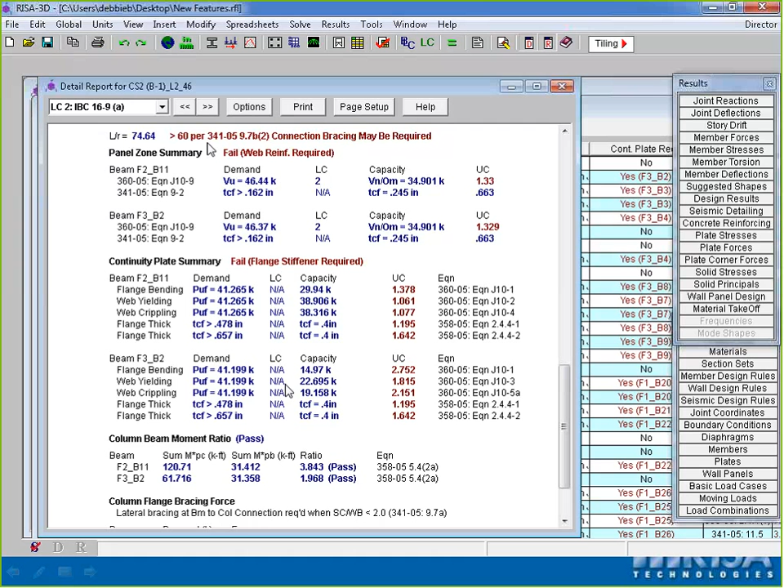So I would have to then say, how do I want to address this, and then rerun it. The column beam moment ratio, it looks like it's passing. It's taking the sum of the moments there and giving me a ratio, and it is passing.

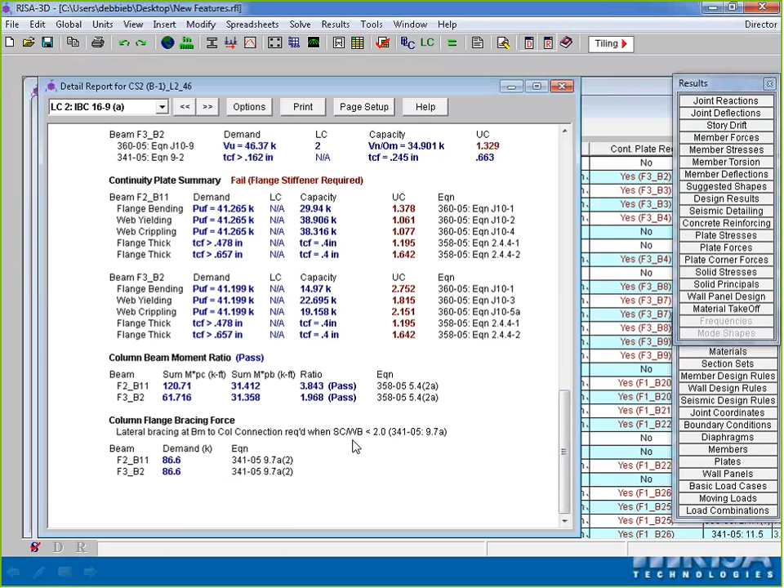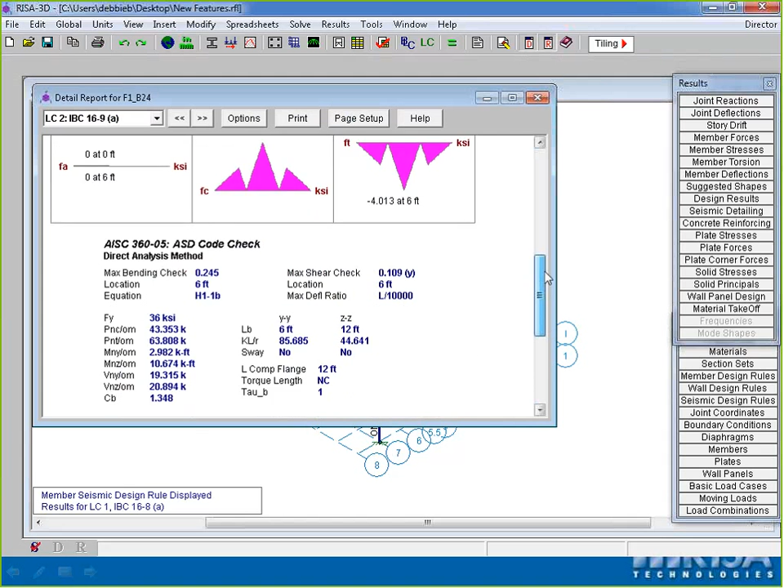But here in particular, this beam is giving me whether it's seismically compact or not. It's actually just compact. This is a minimal frame ductility, so I don't have a lot of requirements for this beam. But it does give me information based on the unbalanced force on the beam. If you remember when we looked at that unbalanced force, we were seeing the braces coming in with two forces, one in tension and one in compression.

And we've got 30% here which gives me the low value. This is going to be based on this equation. What we get is an overall force on the beam, and that force is going to give you a horizontal component and a vertical component.

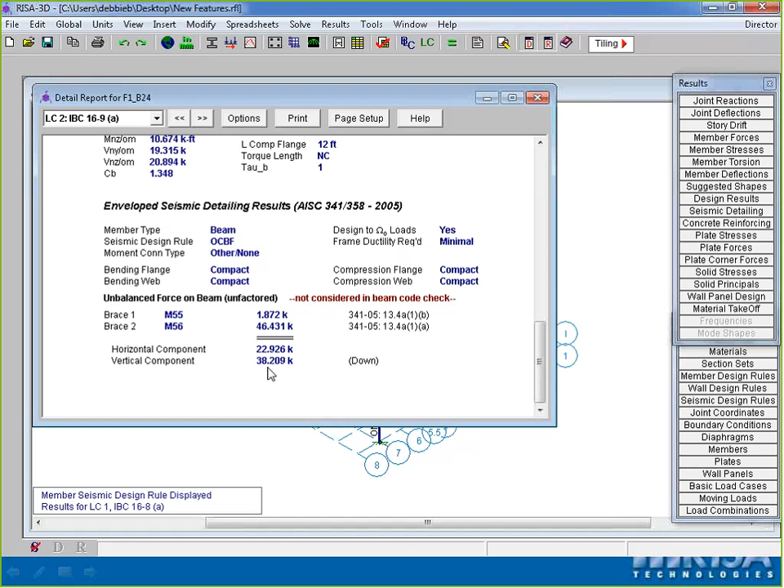So if I wanted to account for this on this beam, I would go ahead and put the 38 kips directly as a point load on that beam. The horizontal component is something people probably don't put into the beam, but the vertical component might be something I want to go ahead and put as a 38 kip point load on that beam. And that was this beam right back here.

We can look at a brace. Let's click on that brace that was contributing. That might be helpful to see. That brace coming in here is going to give us the K/R. There's a special criteria based on the 360 that we want K/R to be under 200. We've got that there, and that's going to be okay and checking out.

We've got right here the required connection axial strength and the two values, compression and tension, versus the actual. And then below that we see the same information we just saw, that 38 kips applying to that beam, and the beam here is the one I just checked out. So you have all that information on the beam for the brace frame.

For moment frame here, we can look at a moment frame beam. That might be a little bit more telling. This is for this special moment frame. It is seismically non-compact. The beam-to-column, column-to-beam moment ratio did pass, and the span-to-depth ratio did pass. It gives us all the bracing information for the beam.

And then here it also gives us the required connection shear strength and our demand, and we've got our demand listed here for the required connection moment strength. So we're going to look at our VG, which is our shear for gravity versus our probable shear, and we've got the overstrength right there.

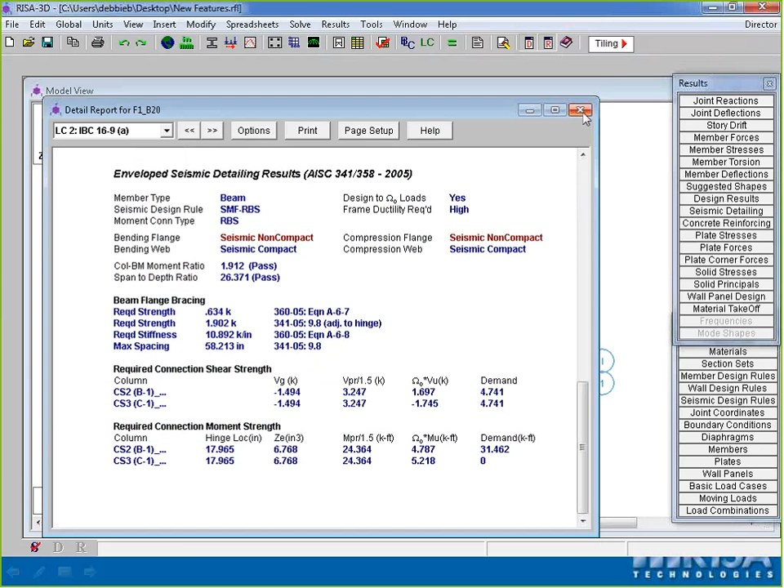Okay, so all of this is listed out, each one for each beam, each column that you design, and you go ahead and tell the program that you're using that seismic information. So you've got lots of ways to use this, either as spreadsheet results or in a detail report, but it's going to give you all the different pieces.

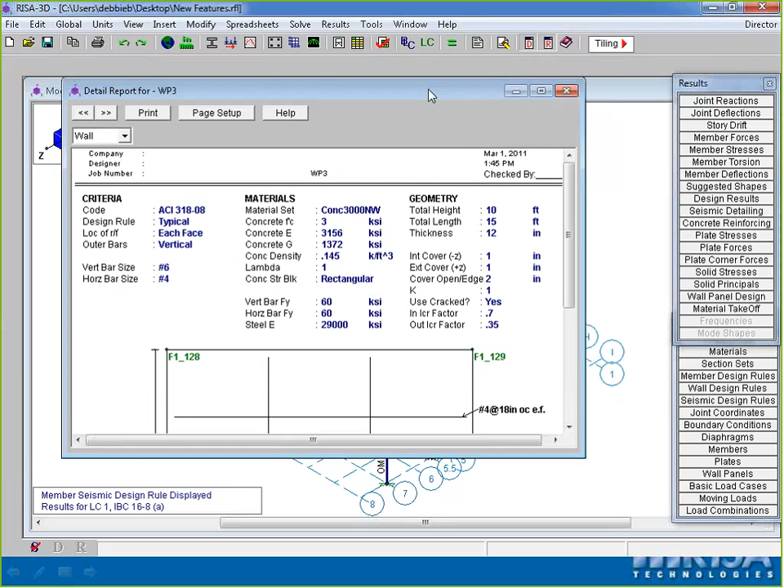And then let's see here. So let's also look at our concrete wall. If I take a look at this concrete wall, I'm going to zoom out here and look at this a little bit farther. This is really going to be where you work with your lateral walls. You can use in-plane and out-of-plane, just like we saw in RISA Floor.

The in-plane overall number 4 is at 18, number 6 is at 18, for each face and each direction. It shows us the different load combinations used for in-plane and out-of-plane. We get a lot more information listed there.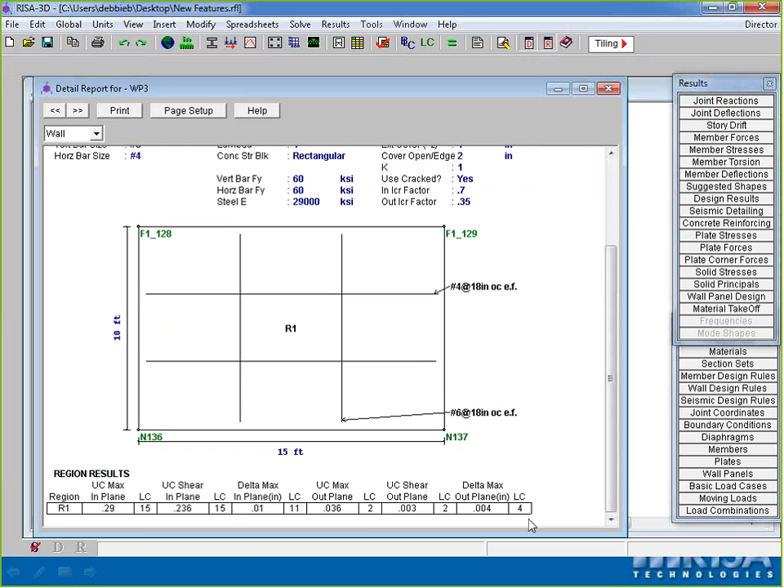We also can see in the region report what's happening per region. The geometry, criteria, and materials are all coming right off of our design rule. We told the program what bars we wanted to use and what material to be using.

As we scroll down, here we have an I-cracked factor. We see the bending results and the shear results, the envelope, telling us the minimums and maximums for the shear, the axial shear, and moment. If I scroll down further, it gives me the deflection details listed out.

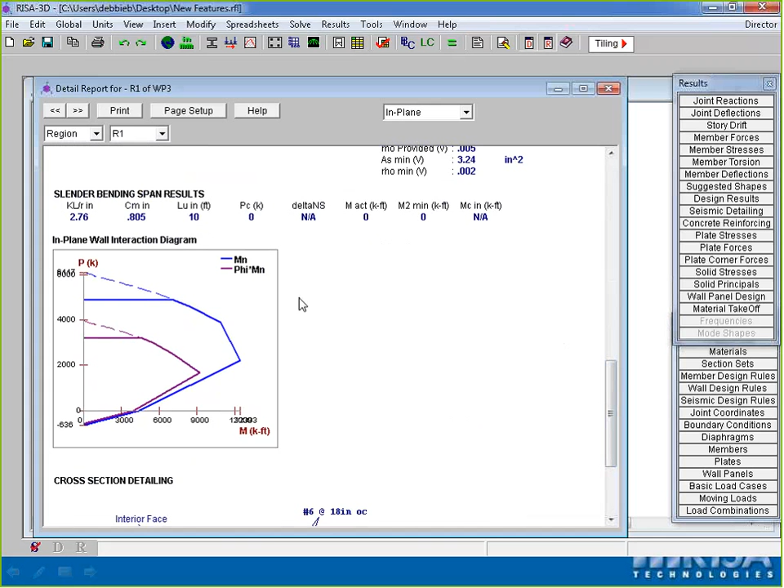We have the area of steel provided, and below this we get the in-plane wall interaction diagram, showing the moment versus the axial, and then we also get the detail report, or cross-sectional detailing of what this actually looks like in plane.

Out of plane is just a click at the top of the screen, switching from in-plane to out-of-plane. Below that you get 318 all listed out, but it's going to give us a little bit more here regarding the axial and the bending.

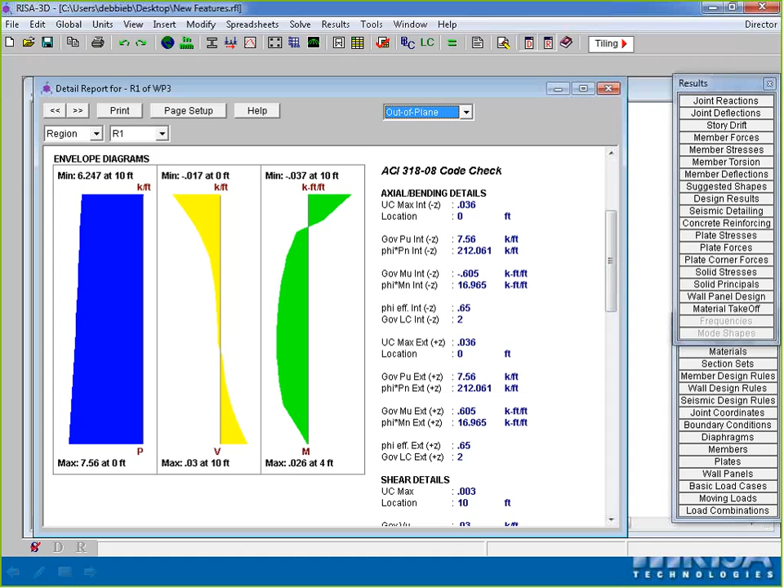We're now talking about the positive and negative local Z direction because we're doing 2 different types of reinforcement out-of-plane on each face. Remember we talked about negative Z and positive Z — that relates to using interior face versus exterior face reinforcement.

You've got shear details listed here and deflection, and scrolling down below that I now get an interior and exterior interaction diagram. It gives me the slender bending results, and scrolling to the bottom I'm looking at another picture of that cross-sectional detailing.

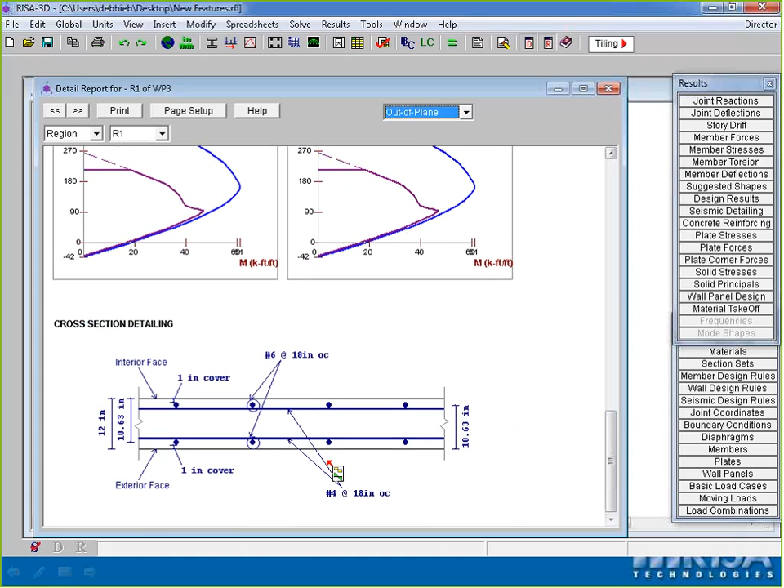So you've got a lot of information. One of the pieces I mentioned is that I've got a lot now, even going into the detail report, about that positive and negative Z direction.

One thing I did — if you'll notice on my drawing, I kind of messed up here. It looks like I did 2 different directions: I have dark gray on this panel and light gray on that one. So what's happening is I'm looking at a whole row of walls, and they're actually in and out of plane, giving sort of confusing results.

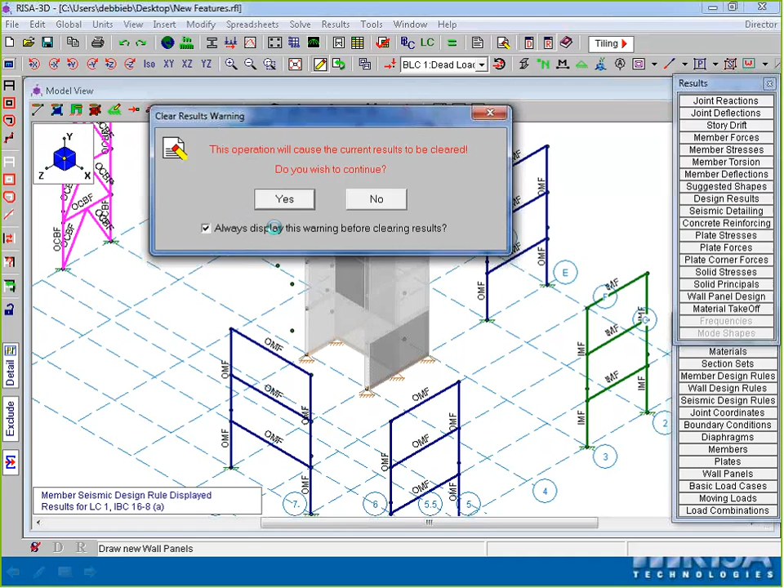I can fix that by just going to my wall panel flip button. If I click on that wall panel, that's the same dialog I'd use to draw a new wall. But if I go to the Modify Wall Panels second tab, I can say use this out-of-plane flip, and apply it by clicking apply — you'll see that gray flips to the other side and that gray flips to the other side. Now it's just more regular.

I also did something a little odd — I drew the walls separately, 3 panels, but in RISAFloor that was just sort of the way I drew it. I could have drawn one whole large wall and gotten results based on that.

I'm just going to solve this here as an envelope solution. We're going to run through and see that. What you're basically doing here in RISA-3D is just getting separate results for this, and we'll see those results in a spreadsheet in a second.

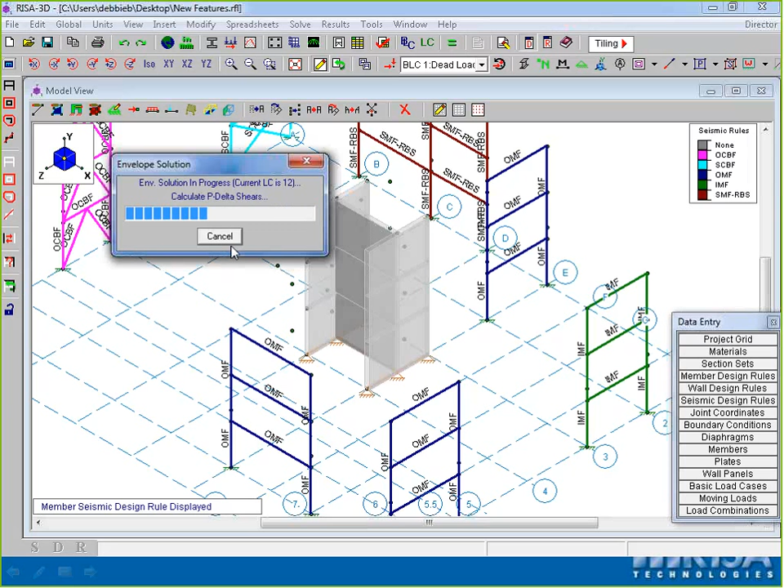It's running through all my load combinations. So now when examining this concrete wall, I probably didn't need to run all my over-strengths, but that's okay, we'll run through it anyway. It's going through all the different combinations and P-deltas — I did have P-delta turned on for everything, so that's helping here.

Let me close that out and take a quick look at the results. In the results toolbar I've got the concrete reinforcing spreadsheet, starting with beams, going to columns, and I'll go to the walls in particular to look at the wall results. I've got horizontal bars listed out, vertical bars listed out, and the thickness of each wall. I also have wall design results here.

This gives me a little bit more of the design information. We have it concrete in plane and concrete out of plane. Concrete in plane gives us the maximum unity check shear, and we see the PN and the Mn phi, Vn phi. I've got all that listed out.

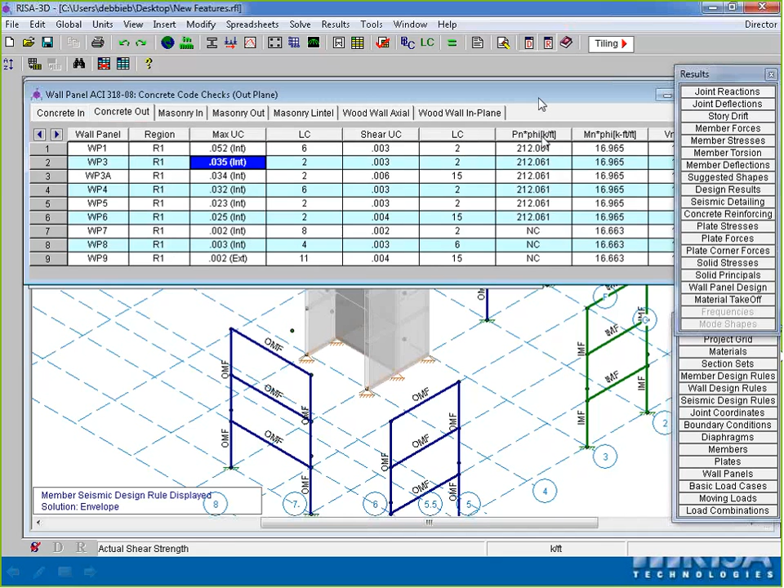I also have the concrete out of plane listed out for me here too. So lots and lots of results for concrete walls. We kind of hit a lot of everything in RISA-3D and RISAFloor. I'm just going to quickly jump over to RISAFoundation to tally up all the different pieces we've got in here.

If we go using the Director button, we go to RISAFoundation. All of the information that came across goes in from RISA-3D to RISAFoundation. And I'm going to solve this model right here, and it's just going to go through a couple of different load combinations, solving all the different stuff we did. One of the things, if you haven't seen RISAFoundation in a while, what you'll notice is we're looking at a lot of different things.

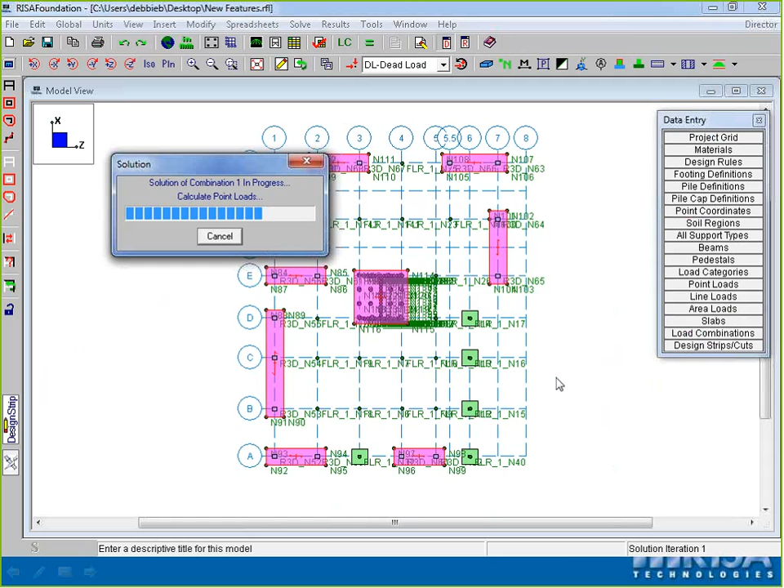We've got footings, we've got pile caps, we've got combined footings, slabs. I didn't do any grade beams in this model, but you could have grade beams. Combined footings also, so like I mentioned, a combined footing, basically you can put a slab down, you can put pedestals on top of that, which is what we did here. In this pink region, I put pedestals on top.

I have a slab below that, and then I'm going to be able to get my overturning checks on that. I'm going to be able to check all of my different information, just like I would on an actual footing, but this is going to be a combined footing. So it just takes a little bit of time.

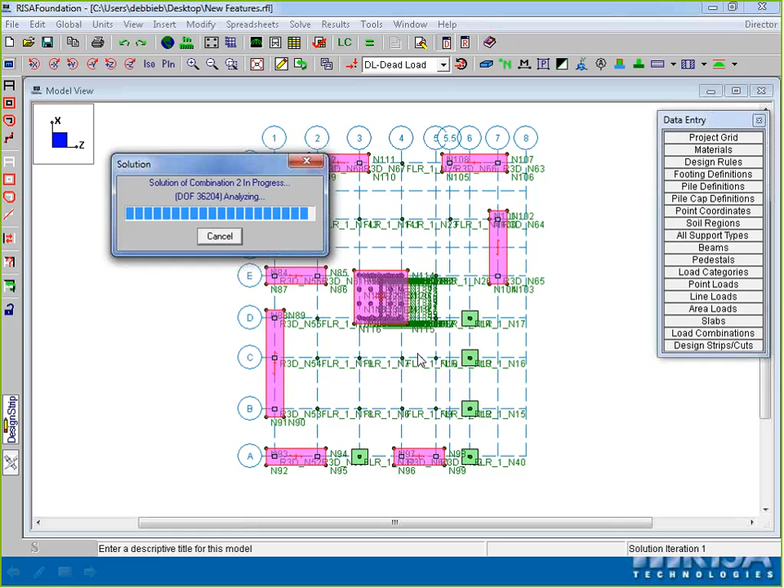RISAFoundation does have the added, it's doing all the different load combinations here, but it's also submeshing these plates, and then we are getting design on top of that. So a lot of times you'll see really the design is what's taking the time when it goes through the solution. But it is going all the way through here, and let's see what we get.

So if I look in isometric view, I can see I've got some pile caps on top of here. But the one thing that I want to pay attention to is the new items we got in here, which is we are doing safety factors here. We are looking right at the safety factors.

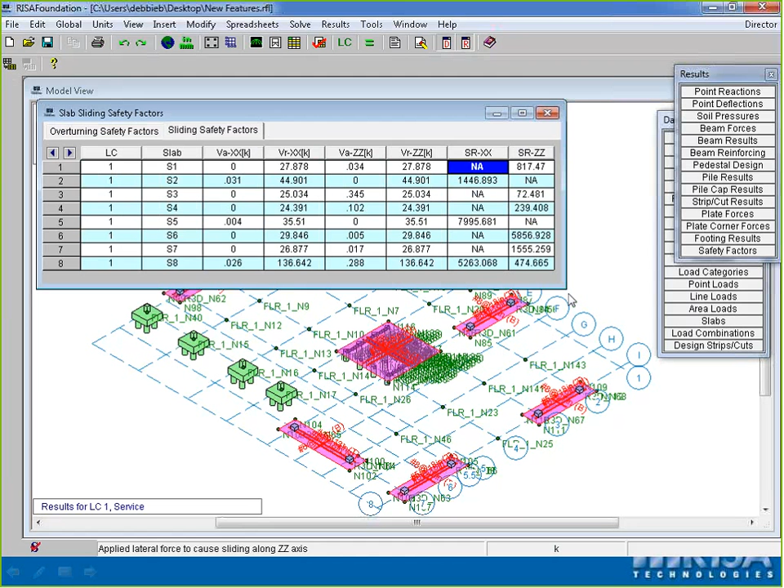On the last tab, I have slabs. I can see that I have moments in the X direction and the Z direction. In the sliding, I have overturning checks. I have sliding checks, and both of those are listed per slab. They give you the actual applied lateral forces applied in those directions, versus the resisting, and then it gives you a nice ratio there at the end, so you have the safety factor ratio listed out.

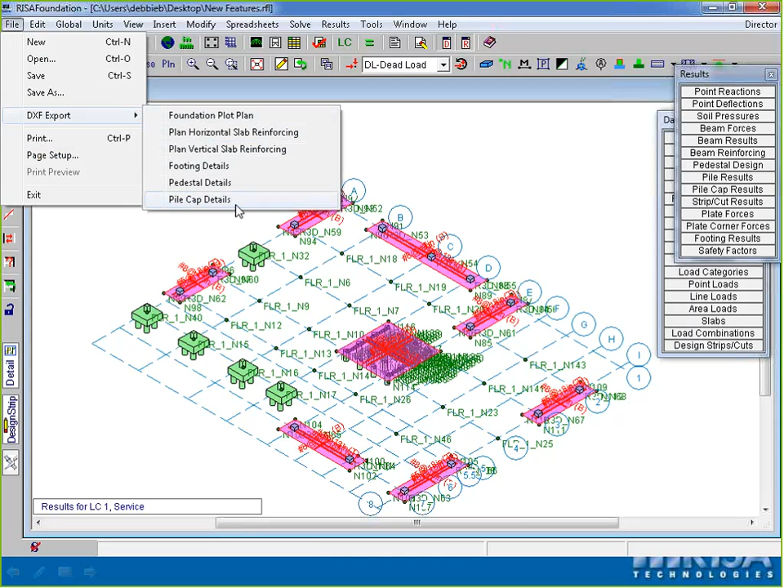You're also going to be able to export that based on the pile cap details listed right on there. So you already had a lot of different export options: foundation plot plan, slab reinforcement, footing details, pedestals, and now you're finally able to do your pile cap details. So really everything in this model can be sent in and out as a DXF.

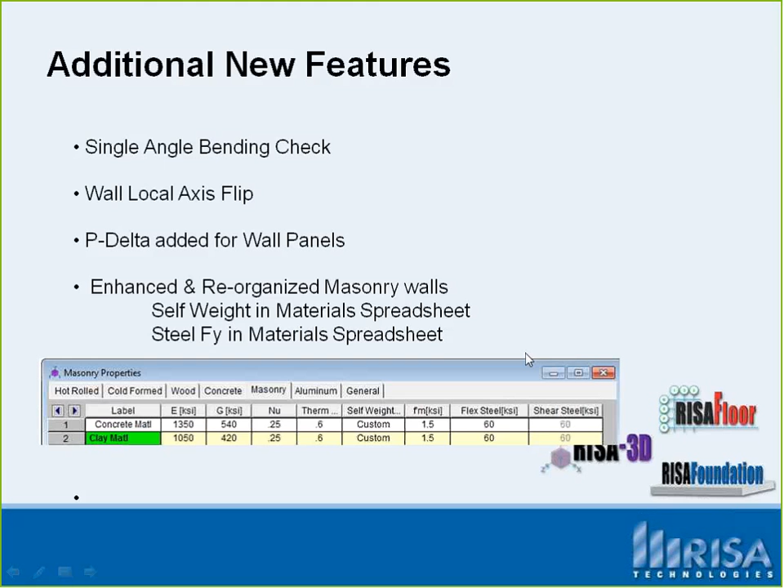Okay, so you've got a lot of stuff going on in here. Let's just jump back quickly here, and basically at this point, just leave it open to questions. Hopefully this was just a little piquing of your interest in what we've got coming out. There's a lot of little things along the way, obviously, and a lot of small, teeny little enhancements that I didn't get to today, but I wanted to show you some of the big features.